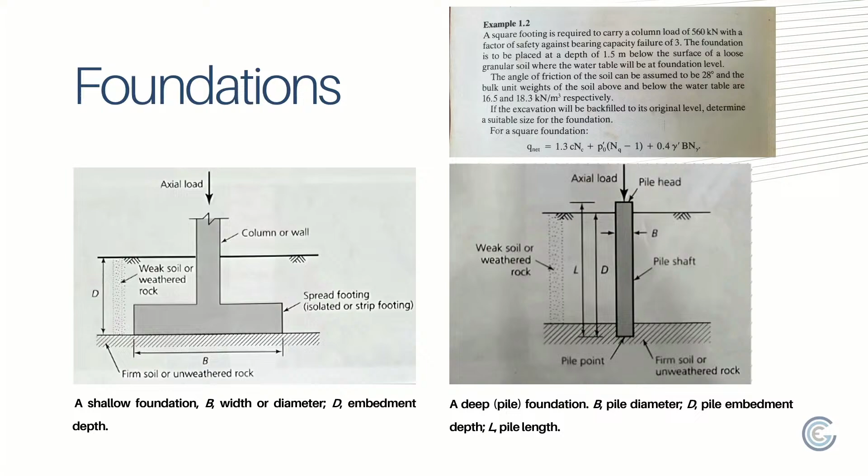So a shallow foundation is where the width B is much greater than or equal to the depth of embedment below the ground surface, right? Whereas the opposite is true for a pile.

So at this point, I want to give you guys a little exam question, but time doesn't allow. But surprisingly, we had to do all these things by hand calculation. I could put that question right now to ChatGPT. I don't want to be a student now. It takes the fun out of it, right? 1 minute, you get an answer, right? But whether it's correct or not, you don't know, right?

So another term that's used a lot in our field now is geotechnical earthquake engineering, critical. And you start to see things about seismic site response analysis, spectrum, site class, what is a site class, soil-structure interaction, liquefaction, big topic, right? And that's a word I do not put in reports very lightly. I'd rather talk about liquefaction potential than liquefaction.

When people read the word liquefaction in a report: oh my God, the whole site is going to liquefy and suck the building under the ground like the giddy house. Far from the truth, right? It's really a statistical analysis that we do to measure risk or the likelihood of a site or parts of a site that may or may not liquefy, right? So it's a risk analysis. So we have to be very careful when you read a report that says the site can liquefy. Sometimes that's not the case, right? And it basically affects the project moving forward.

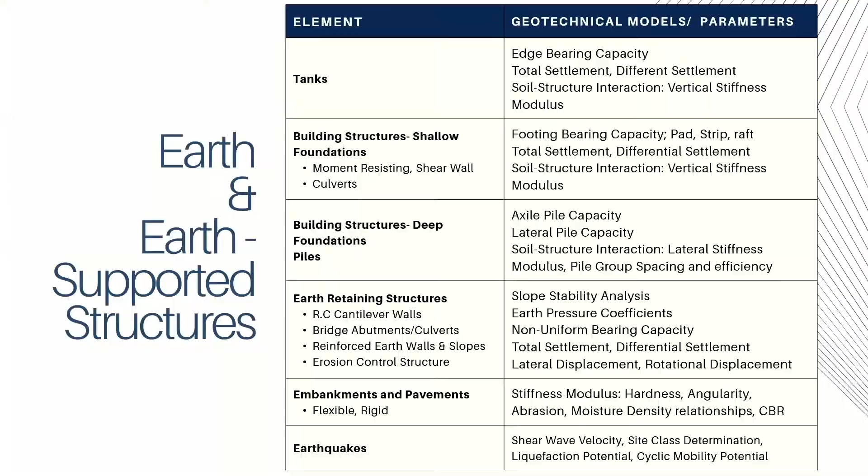And more importantly, we can't have any workers who have any form of drugs in their system. So someone who smokes marijuana can't work for us, right? And we spend a lot of time on training, use of these drilling rigs, because safety and insurance in this sector is critical. You pay a lot of money just to even work on these projects.

And then you can have an idea of what parameters we have to provide in terms of running the analysis for a tank foundation. Allowable bearing capacity, total settlement, differential settlement, subgrade modulus, stiffness. These things might look new to you guys, but we can't get any of these things without a borehole or two, right? And lab testing.

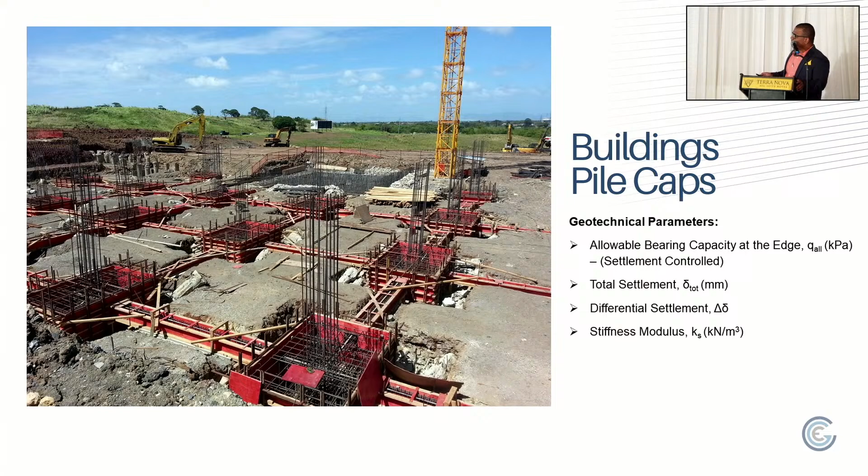Building, pad footings. You guys are accustomed to seeing pad footings. This is the hospital building, done by China Railway. A 5-story hospital designed to a much more scrutinized seismic category than a normal structure. And we have to provide all these things and check settlement over the building footprint. Pile caps, very important. Connected by ground beams. So this is what a pile cap would look like in terms of the construction of it. And then we go to raft foundation.

Can you just look at the ground and tell me what I should do for this new building? Just do 1 borehole. I said, nope, can't do it. 2? Nope. 3? No, sir. 4? All right, we'll work with that. Send a mobilization invoice. There's always a negotiation; clients don't want to do a site investigation. And I'm not willing to take that risk.

Because when you spend millions of dollars investing in a building like this, and you want to spend some change on that risk, I'm willing to walk away from the project. Right? But some clients like to push the limits, right? Because it's always a risk when you know what failures can happen.

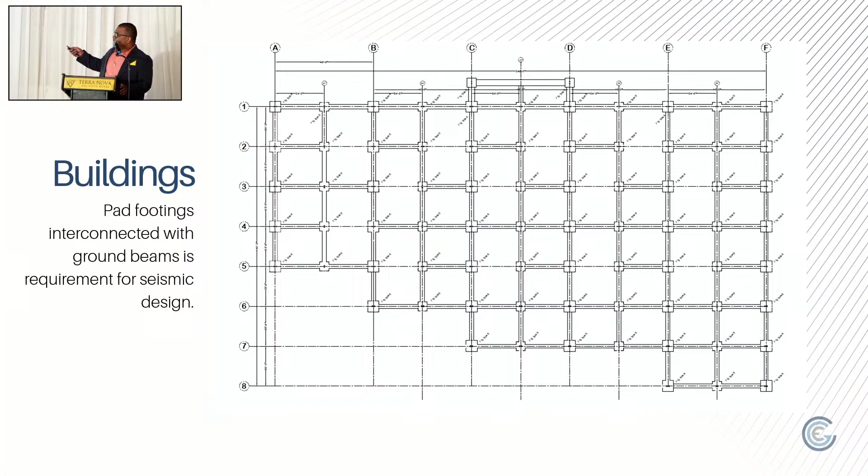So let's take a typical warehouse structure. We could take any line in terms of the distribution of the loads across the building. And we're required now to have these structural ground beams for seismic design. And then we can produce a stress distribution model below the footing so we can see what footings are loaded, where the stresses are, measure deflections, settlement, and all these things, right? These finite element models, you can do a lot of things with them. But like anything else, garbage in, garbage out.

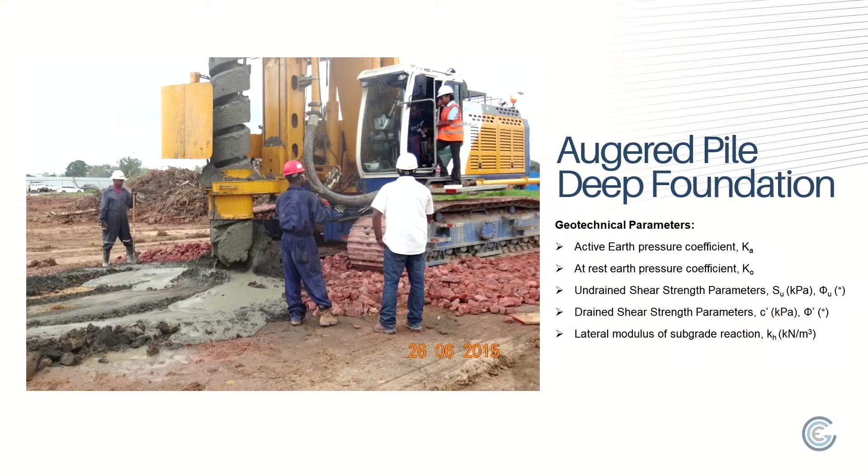So we have a lot of CFA rigs in Trinidad as well for deep foundations, and for lateral models, the modulus of subgrade reaction is a very important item that we need in terms of the analysis, the shear strength, undrained shear strength if it's clays, and how we analyze these types of piles.

3,345 kilonewtons. And the more pile tests you have on site gives you the ability, because you have more reliable data, to actually reduce the factors of safety that we talk about in allowable stress design. So I can now give the clients options in terms of maximizing efficiency by using fewer piles because I have data, right? So all this is tied back into the final design.

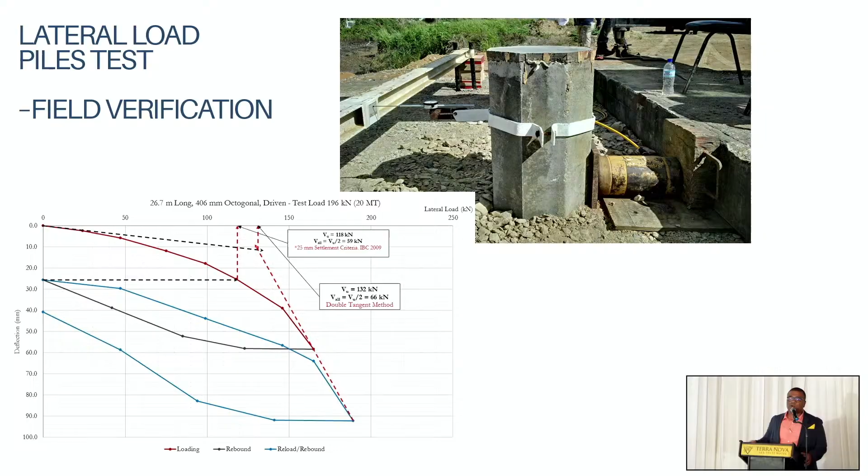I say this to also say that in Trinidad we have about 5 geotechnical companies, all local, no foreigners. And we don't compete. Yes, we might compete on price. But if one geotechnical firm has a problem, well, they always come back to Dr. Gay, right? But we always try to work together. If a piece of equipment breaks down, come by me, no problem. We work out something. Because at the end of the day, the value in this is building the practice. And I value building the practice more than dollars and cents. Right?

So 60% of the failures that we have to deal with every day are retaining walls. I'm going to look at some of them. I'm going to talk about a very important one, which is a bridge failure. So remember the modes of failure for a retaining wall.

I didn't want to bring it up, but COVID did not do justice to some of our engineers, in that we have some graduates who came out with a civil engineering degree and don't know what a retaining wall is. I kid you not. Right? So for our younger engineers, if you want to be good at your craft, you have to put in the work. Ask the questions, do the calculation. Don't ask ChatGPT. Do the hand calculation.

When we investigated it, we realized that the contractor backfilled the retaining wall with clay, highly expansive clay. Half was done in sand, and the other half, at the joint from there down, clays, no drainage. And this was done by the ministry. So I say this to say that your design is just as good as the construction quality, and drainage is key to our retaining wall infrastructure.

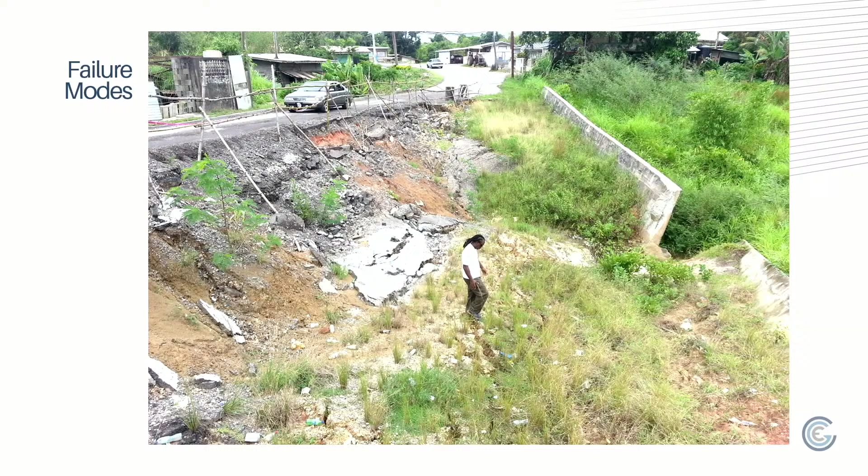These walls cost millions of dollars. And in one pipe leak, that's it. Right? So we have to now come up with a solution. A simple one that we did was that I've designed an over-designed box drain with a metal strap on it, and strapped the pipes to the box drain so that when the pipe leaks, you can fix it, one. And two, if it leaks, it goes in the drain. The water company fought that, and now they're using it all over the place. Right? Common sense, not so? So we have to be careful with the whole infrastructure for these types of retaining walls, reinforced concrete walls.

We have other types of walls, Allan Block retaining walls, and most clients would listen to their contractor over the engineer. You want to build a 30-foot wall with a system that cannot take that type of lateral stress. And these are the outcomes, right? And then we get called. As a matter of fact, this is the second wall he built. Right?

More so in the Caribbean, as our infrastructure ages, scour. Retaining walls along riverbanks, scouring the foundation. Nobody checks, nobody maintains anything, so nobody is checking to see how we're going to treat with these types of failures. And then we have a tendency in the Caribbean to creep to get as much land as we can on the riverbank. And these are sometimes the consequences. That is the man falling down in the river there, and his building collapsed in the back.

I just put in this slide to show you that we do a lot of different types of retaining walls. This one is called a flex MSE wall. No concrete, fully vegetated wall with these bags wrapped in a uniaxial geogrid. And we put plugs in the bags with, I think it's 30% organic with sand. And you put the plugs for the plants you want to grow. And in 2 weeks, that was the outcome. Right?

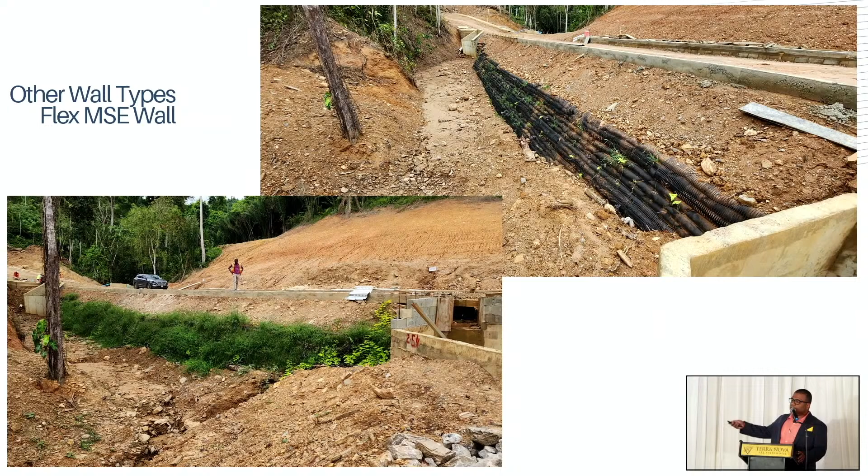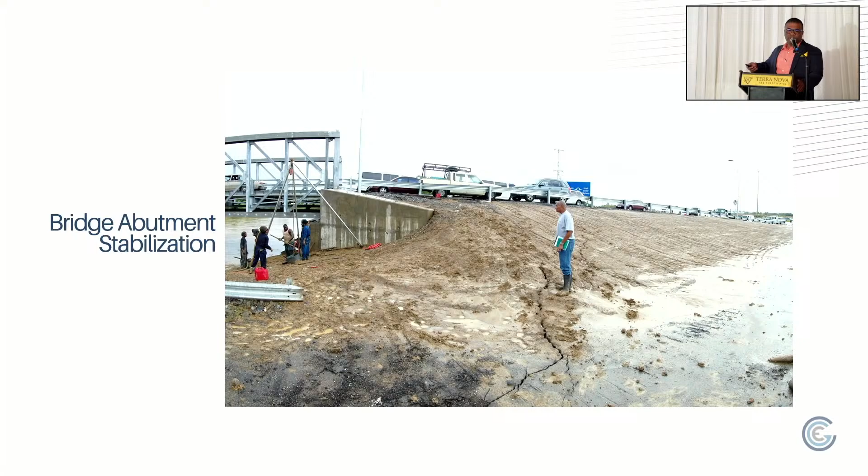As you can see, where this gentleman is standing, you see that crack going right through the embankment. That's us trying to do our investigation to figure out what's happening. The entire abutment was moving. And if you realize something else, what is on the bridge? Live traffic. Right? So, you know, things go politically. Sometimes you have to do what you have to do to get things done.

So the free end of the bridge was moving to the other side, and it ripped the anchor bolts out of the other abutment and punched through the other side of the abutment. That's how high the stresses were. Right? The engineers cut the beams to put a 1-inch thick plate so that the beams would not go any further, and it punched the plates through the abutment again. That's how much movement we're getting.

So we had to come up with a design with CFA piles to anchor the bridge. That main beam here was designed by my classmate, I won't call his whole name, but Danny Chin. In that we had two 500-ton jacks that we jacked each system against each other to get movement. And then we cast the beam to transfer all that load to the piles.

That's the difference when you understand the slope stability analysis of how deep-seated the movement was. And for engineers who design embankments and bridges, just for clarity, when you want to approach an embankment onto a bridge abutment, you have to consider that there are additional stresses on the piles. The embankment produces additional lateral loads on the piles, not just the active that you measure from your Ka, PA equal half Ka H squared, right? Gamma. So you have to consider all of those things.

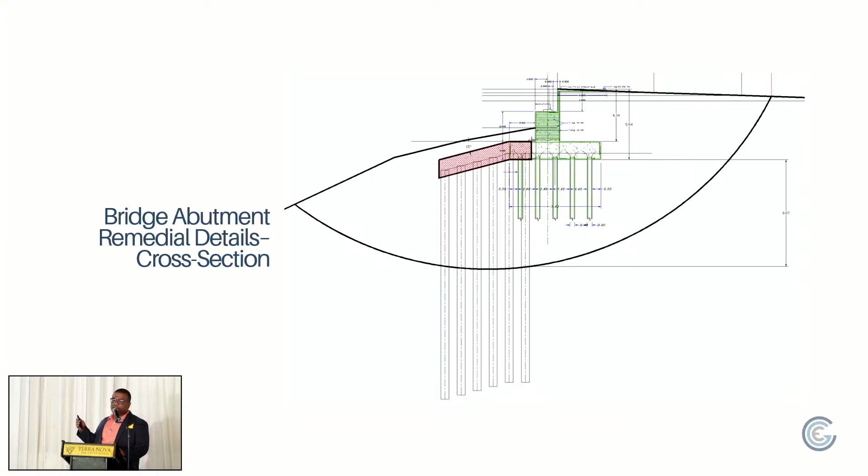You know, Dr. Gay, as brilliant as he is, the shape of the design is for a reason, that the resultant load, right, is at an angle. So he wanted the piles to be designed on a downslope so that if the bridge tries to move, it pushes the piles in the ground and increases the actual capacity. That's the solution implemented. That's the guys taking out the jacks.

So, in line with our sustainability plans, we try to do a lot of projects where we reduce the amount of trucks and concrete and emissions coming to site. And that's what Tensar allows us to do. And more of our clients are asking for more sustainable designs. We have reinforced earth slopes with these coconut fibers where you can put topsoil, put the coconut fiber and stabilize the slope. And then you could spray it and vegetation grows for erosion control.

We have cut slopes. We have to understand, when we cut a slope, for it to remain stable, how we do it, is it going to be stable? Have you considered what we call pore pressure changes in the slope when you have rapid drawdown? In other words, when the reservoir goes down, when it's refilled, how does the pore pressure regime inside the cut change, and how do you model it for long-term stability?

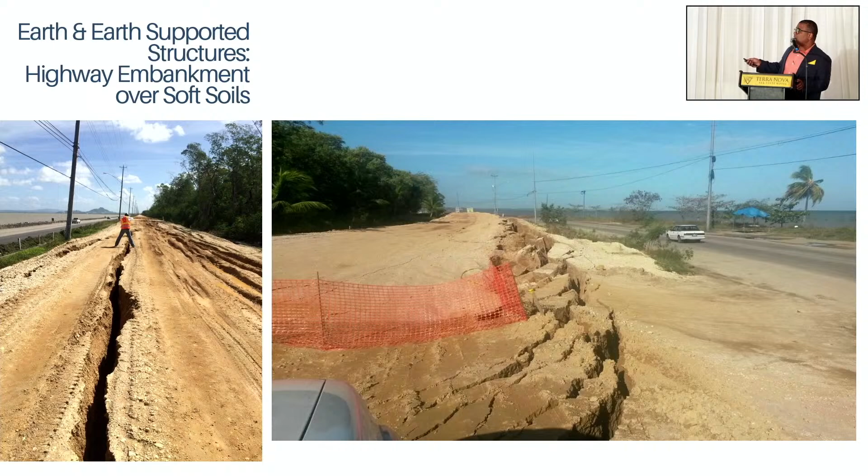Pavements. We do a lot of pavement investigation and redesign. And as you can see, rutting is a big thing. You have to understand the stresses below into the subgrade and sometimes what material is used in the design. In this particular case, as the government expanded the highway, sometimes they just widen a shoulder. Sometimes the shoulder is not designed to carry.

Remember, as you move the traffic to the left, the heavier vehicles move as well. So if the trucks coming from the quarries are coming in now to drive on the old shoulder that is just expanded or widened, sometimes it doesn't carry the load, right? So you have to investigate the pavement to understand what you want it to do and how long you want it to remain.

So site investigation is critical to preventing all that we just saw a while ago, right? And it's important that we get the information so that we can actually do it. One of the major complaints that I hear every time I come to Jamaica: man, them take too long, brother. 1 year, 6 months. Those things are unacceptable in this time and day.

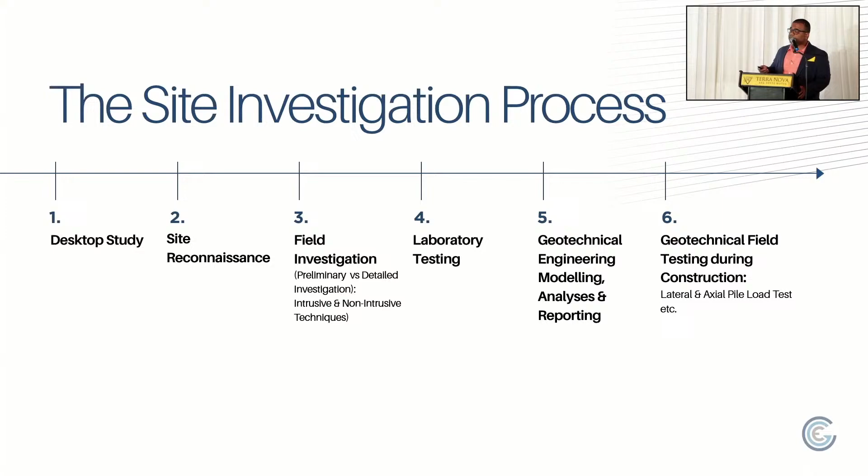This document I'm going to share is from the oil and gas sector, and it outlines the entire specifications for site investigation, right? All the ASTM standards, so that you guys could understand what is required from the geotechnical consultant. 5 minutes, right? For this document also, they have a checklist. It goes through every single geotechnical response that you want, and you can just tick off the things in Adobe and send it to the consultant, exactly what you want to be outlined in the report. It covers every aspect of the geotechnical practice.

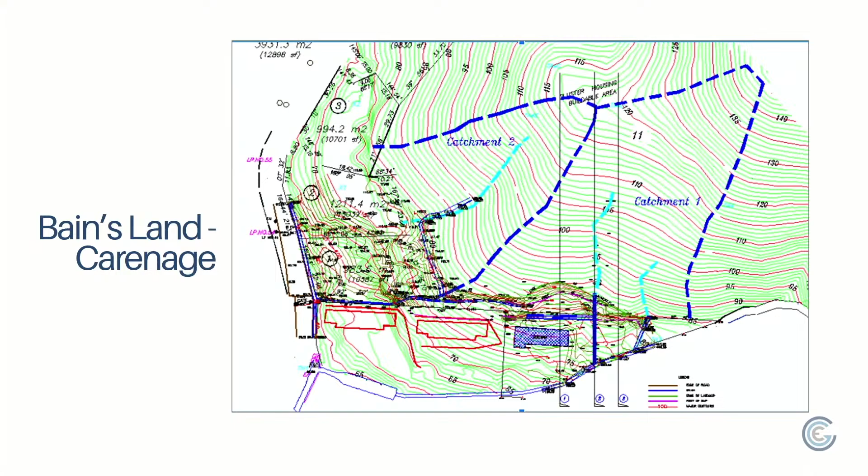For this study, we need the maps because we look at things in terms of scale, right? For a house, we wanted the 2 boreholes. But sometimes we send the surveyor out and the man only surveys within the boundary. But look next door. We have things outside the cadastral boundary that are going to affect the project. So sometimes you have to look outside the site to ensure that you cover everything. For this particular project, the client surveyed just beyond its boundary. That's the extent of the site, the mountain behind the property, so the catchment and the size of the catchment. That water course came down.

He wanted to build a townhouse, and he cut the slope. During construction, luckily on a day when nobody was there, the mountain came down and took half of the building and crushed it. It would have killed everybody inside there. So this is to show you why the maps are important, why we need to study things outside the site boundary, because they can impact your site.

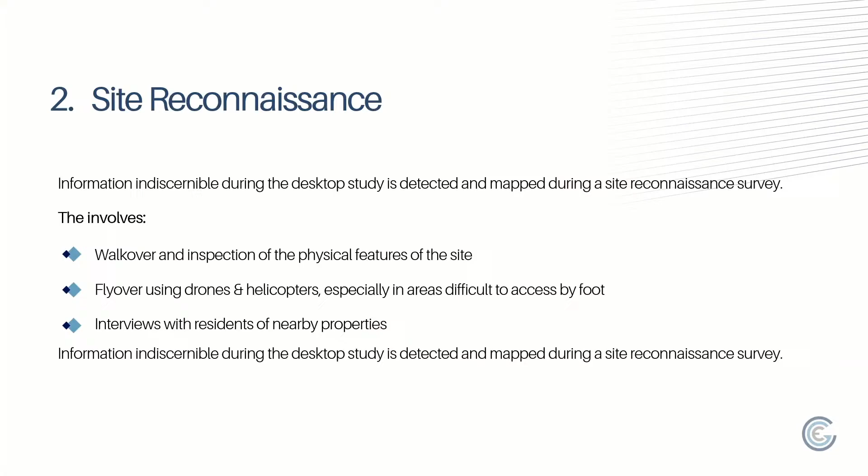Site reconnaissance. I'm going to stop after this because there's so much more I can say. I'll show you this last example. For the students over there, engineers need to go on site. You can't sit down in office all the time and run computer. I cannot design anything I don't see. So you need to relate the two by going on site, going in the bush, put on the coveralls, and observe the site, right? And by talking to people, it gives a good indication of what you can do.

On this particular site, we went using the maps and looked at what took place. It was a quarry there years ago. When I went on the site, I saw some guys. There are some squatting communities around the site. I said, yo, dada, what go on here? How come nobody squat inside this stuff? Man said, boy, daddy, bossy, every time rainfall it moving. Not one borehole had to be done for you to get information. Obviously, you'll have to verify it.

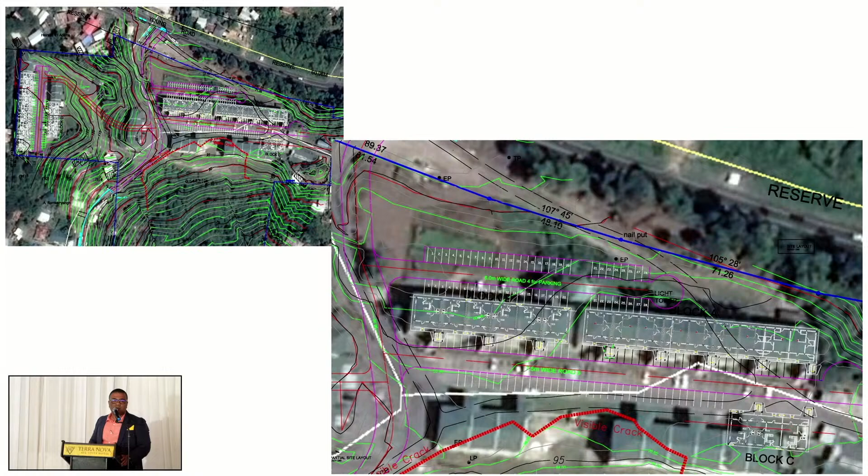52 million, 1 billion in Jamaican dollars today. Failure. Right? So going on the site, understanding the requirements, the history of the site, but it's a brownfield site, a site that was developed before, right? They tried all kind of things to save this, they had to demolish them. Right? And there's about 200,000 people on a waiting list for housing.

So the lessons learned that I just explained, right? That the desk study and the site reconnaissance should be used to plan field investigation from the boreholes, going on site, seeing what you have to do, cut access if you need to see all aspects of the site. These things I could share with you in terms of planning a site investigation. For a tank, you definitely want the one in the center, one at the edge, for differential settlement. For a building, there are many guidelines of how we can do.

Simple things like a test pit. And you need a staff properly so you can see the pictures properly, right? How things transform and change. You can use an excavator just to document what you see. Standard penetration test, which is really what we do. This is one of our latest rigs that we have. We have just upgraded it to do also CPT, right?

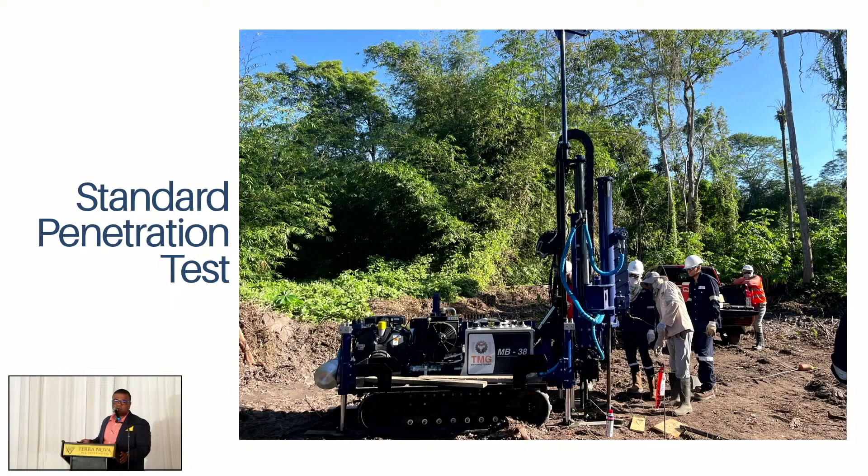And Herbert would understand this, but you can't be a grub and use this rig. You need at least 3 brain cells, right? Guys have to be trained. Okay, you can lose a hand, lose a finger if you don't know what you're doing, right? So our technicians are actually guys who use this type of rig, right? I'm gonna skip that. That job we did in St. Lucia.

The CPT now is what we need for soft alluvial soils because everything is computerized and it's giving you data real time. You can stop the cone. If it's a piezocone, you could actually measure pore pressures in the ground instantly. You could do a consolidation test in the ground. The only thing is that these things are not cheap. The probe alone probably costs about 8,000 US, right? But it's needed to give you the information in a faster time frame and also needed for liquefaction development.

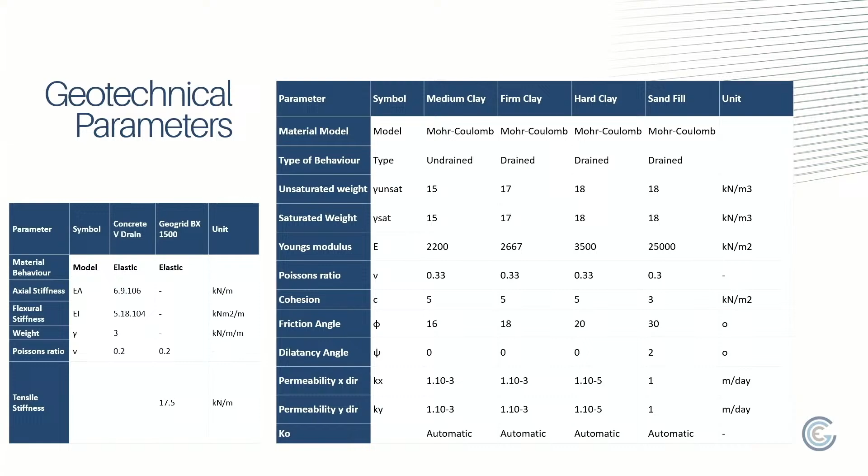So we do all these lab testing just to get the geotechnical parameters. These parameters are plugged into models like these where we can actually model an embankment, the slope stability, the full gamut of the design and actually model it according to the construction output, right? For most of our sites, I'm going to do my own graph, probably present at the JIE one day, in that the monies that clients have lost in terms of the cost comparison for a site investigation is chump change, right?

Here's one site, the client said he only wanted 2 boreholes. We did 2. This one was completely different from the next. One was soft, one was hard. Which one do you use? The soft? Well, he implemented one pile. He got 60 tons on gravel at 3 meters. The next pile disappeared in the ground. He spent 1.8 million TT dollars. That's over 30 million Jamaican dollars, when he could have spent less than a million Jamaican to save the problem. And I could go on and on.

In that somehow we have to educate the clients to understand why the investigation is critical. Everything starts from the ground. And we need that parameter thing. So it's not something that can be rushed. So my advice to the fraternity is that we're going to take our time to build capacity. We have the talent in Jamaica, right? We have the regional presence that we can cross collaborate, right? And we can build the capacity.

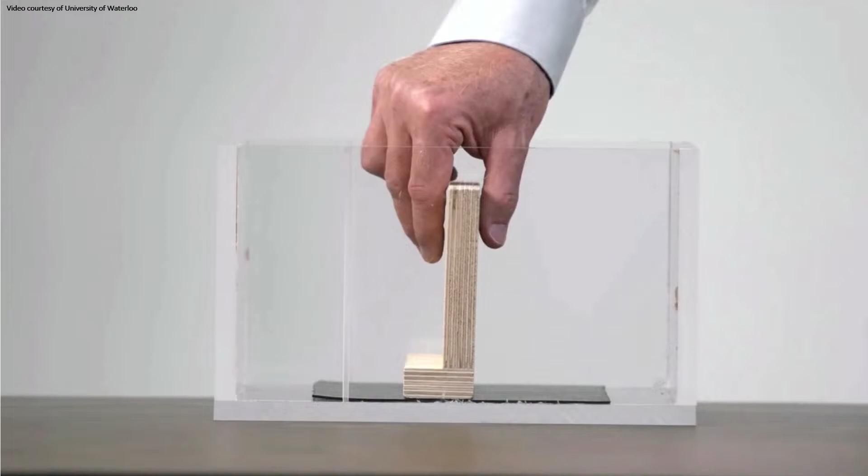All right. So now we're going to take the same structure and we're going to switch that. We're going to put the same marbles. And now we can get a little higher. We can get up to 11 centimeters. It's the same structure, the same marbles. We use them to our advantage. Okay? So we use the soil as help to make our structure stable.

So it's very, very important that my friend Charles understands that soil, because that information is what's going to give you and me the parameters in order to extract as much performance from that soil that you already have at the job site and you already have to spend the money on. Okay? So now let's try to do something with that soil and that information.

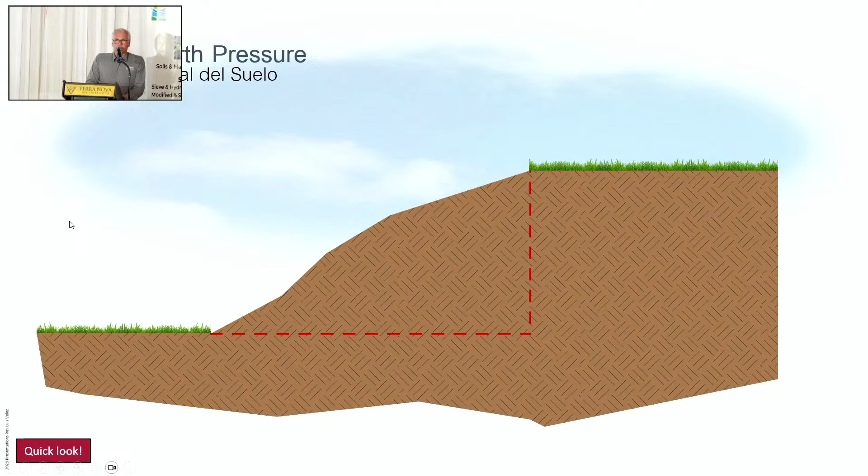I'm gonna use one of my colleagues here, Angel Conde, my boss, and we're gonna use him as my model for this demonstration. So I'm gonna ask him to miraculously make a cut and hold that backfill instantaneously. Okay, so there will be no deformation. That is called at rest. So there's no deformation on the soil, and he's doing all the force to hold that in place.

My boss hasn't been in the gym lately, so he gets a little tired and he allows a little bit of deformation. Now my soil condition is in the active state. And if you can see, he's not holding the whole soil. He's only holding a wedge, a part of it. And that's how we geotechnical engineers lie to the soil and make it work for us.

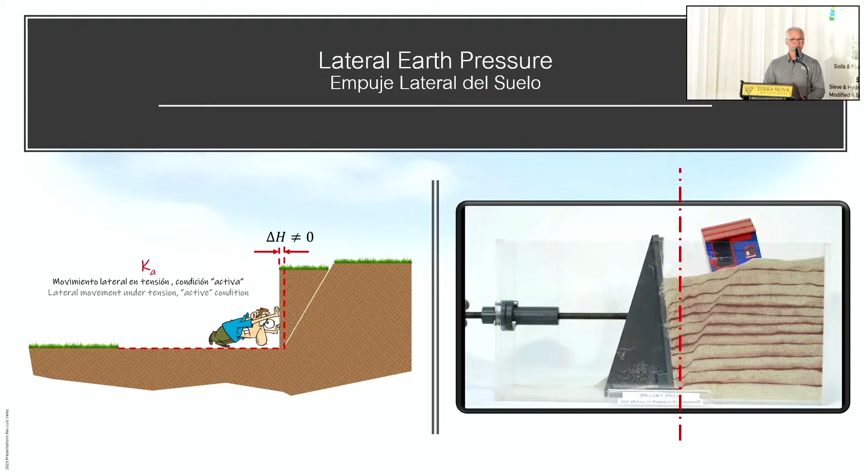You can see in this demonstration that the retaining wall that I'm moving forward basically creates a wedge in the sand. Also, depending on what type of soil I have behind, I have to put more force or less force. If I'm working with gravels and sand, easy. If I'm working with clays and silt, more challenging.

All right, so now I don't need my boss anymore, so let's get out of here. All right,

perfect. So we know that we need a structure over there. What kind of structure? We haven't decided that yet, okay? So if we understand the soil, and if we understand how much force that soil will apply to our structure, now we can make a choice of what type of structure to use. Let's say we can use a cast-in-place concrete wall. We can use a gabion wall too. It's a gravity wall also. Or if you want me to pay all the bills, you can use one of mine.

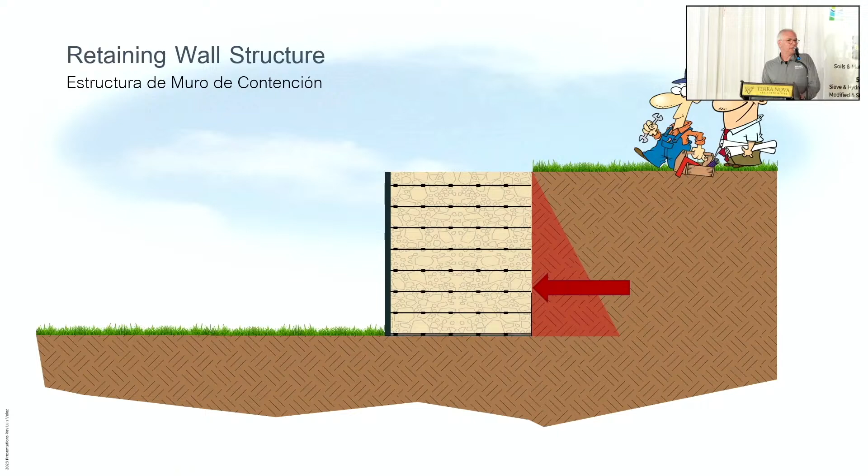All right. At the end of the day, both structures, the concrete wall and the MSE wall, are very, very similar. I'm sure that you guys in your preparation did some kind of calculations to design a concrete wall. It's not much different than an MSE wall.

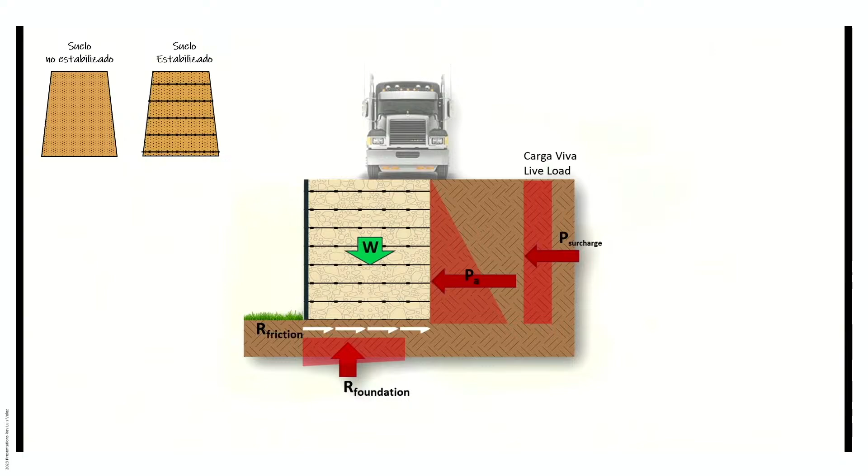All right, so for this type of structure, we have to check it as any gravity wall. We have to check the sliding. We have to check the overturning, bearing capacity, and all that stuff. All right. But at the end of the day, the structure is just as simple as a reinforced mass with a retained soil and a foundation soil to support it.

The facing can be whatever. Charles showed you guys different retaining walls and slopes with different facings, so we can accommodate whatever facing is needed. Sometimes, depending on the facing, we're gonna need a leveling pad just to make sure that the first row of panels or blocks is level. Geogrid, that's what's gonna confine the soil and create the mass.

If you see there, if I add 300 more layers of geogrid there, it's not going to change the behavior of the block. So when you hear somebody say, hey, if I use this type of geogrid, the length of the geogrid can be shorter, that's not true. At the end of the day, the soil weighs whatever it weighs, and the mass is whatever

its width is. Okay? Very important, like any retaining wall, it's very important to include your drainage system. If not, you're going to pay the price. Just spending pennies on the drainage system will save you thousands or millions of dollars, or your reputation. Right?

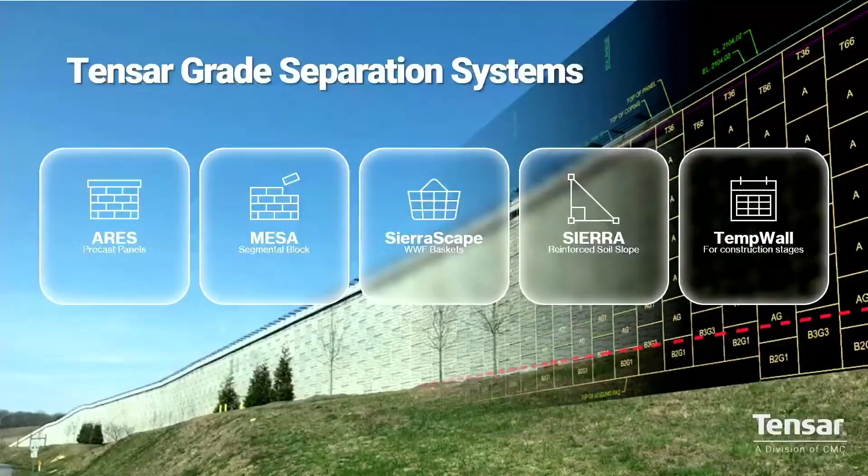So now that we understand what a gravity wall can do, we can make a choice of what type of retaining wall to use. And we have many options that we can work with. One of them, let me move. There you go. One of them would be precast panels. You can see it could be as beautiful or as plain as it could be. Very easy system. It has a mechanical connection behind the panel. It's very easy to install. It should take only 30 seconds per connection, no more than that.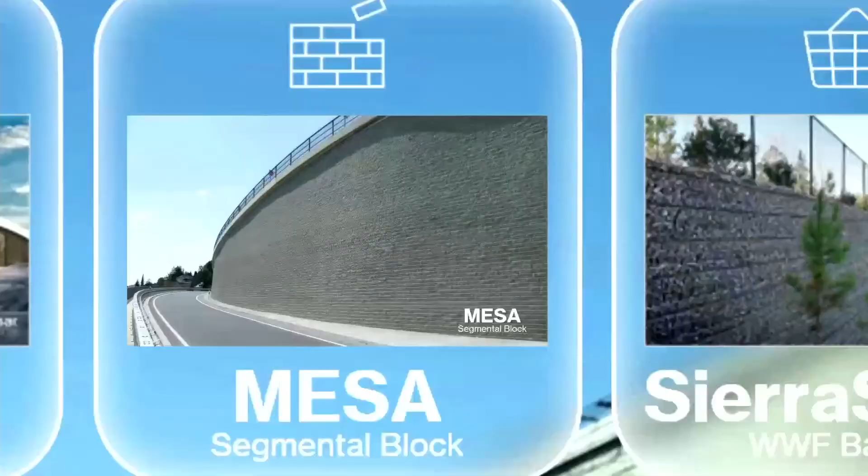Another type of block for MSE walls would be what we call Mesa. I'm sorry, I'm trying to get my cursor here. There you go. That one would be segmental blocks. Again, mechanical connection. What is mechanical connection? Very important here in Jamaica because you have a very seismically active zone. And that mechanical connection between the facing and the reinforced mass is very important. So again, you can reach whatever height you want, if we're doing the design correctly. So we can have a landscaping wall or a wall like 60 meters high.

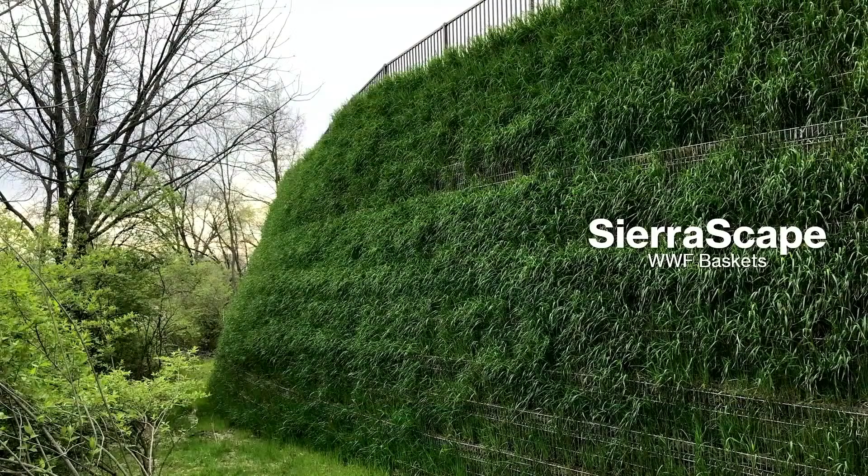Next, I have something that is called SierraScape. It's a wire basket, mechanically connected also. And you can build the retaining walls at whatever size you want with the facing or the aesthetic that you may find interesting too. You can vegetate those too, if that's your choice. Sierra is our slope system, and it can have a vegetated face or rock face. You can have a wire basket at the face or just plain.

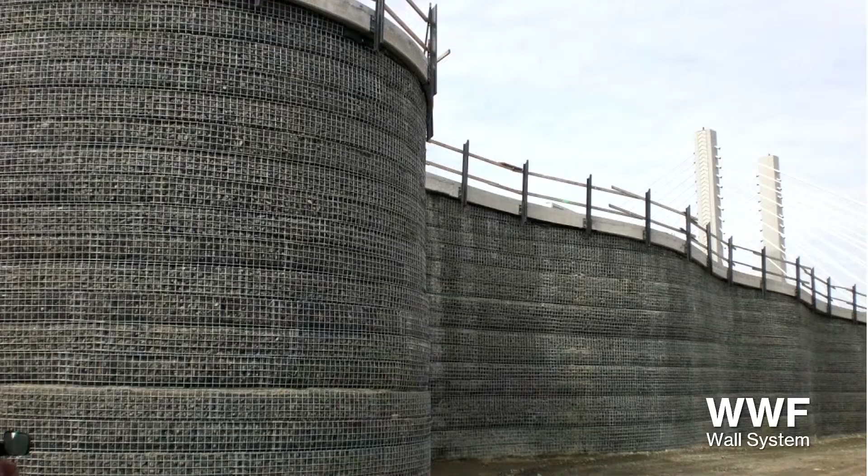All right. So with all those systems, sorry, with all these systems, we can now incorporate that in your project. Let's say that you have a concrete wall with a slope on top. Well, we can switch that to an MSE wall with a slope on top. A slope on top of any wall is a tricky part. It's not as simple a design as it's supposed to be. So we can have a reinforced slope on top and reduce the height of the wall, or we can switch, and this is a more stable condition for the calculations.

Or you can go for what my kids think should be the right solution for every project, which is a vegetated facing. Depending on the type of facing, the cost associated with them will be different too. If we go with vegetated faces, it will be less expensive. If we go with panels, it will be a little pricey, right? Let me pass all of this.

Okay, so in order to design this, you first need to have the geotech information. You need to fully understand the technology and the concept behind the design. So that's where Charles and I will be here. I'm more than happy to come back to Jamaica and explain to you guys step by step how to do the design. That will be a very good excuse for me to run away from the cold weather in Atlanta. So please, the cold weather is the best time for me to come.

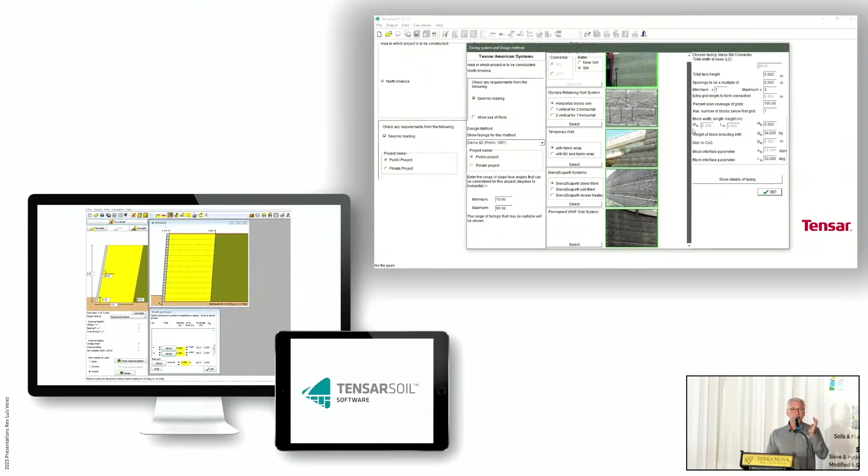So this is our software. It's called TensarSoil. I will tell you guys at the end of the presentation how to get a copy of it. But you can see here it is very simple, easy to use. I could select just what type of project I want to design and select the facing that I want. That's what I'm doing here. Once I select the facing, I could select what design methodology I want to use. It's very important to understand the pros and cons of each one of them.

I could apply my loading conditions or my seismic ground acceleration, change the wall height, the soil types, everything in just one single software. And I could design and analyze any project on it. Okay.

Okie dokie. So now that we have an understanding of the retaining walls, let's look at slopes. Okay, a slope is another type of structure. It's a gravity structure, but we analyze it in a different way. When you try to apply the retaining wall calculation to a slope, or where the facing is too flat, they don't work quite right. Okay, so the calculation doesn't work out quite right.

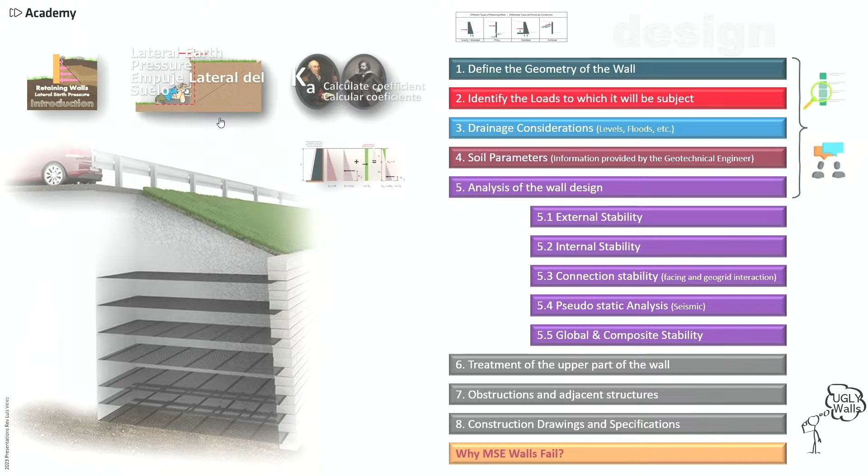So for that, on the slope we use limit equilibrium design, which basically makes sure that the acting forces and the resisting forces are in check. Just to give you an idea, a very flat slope with a well compacted material will be pretty much stable by itself. But sometimes when we try to push the limit, then we need extra help.

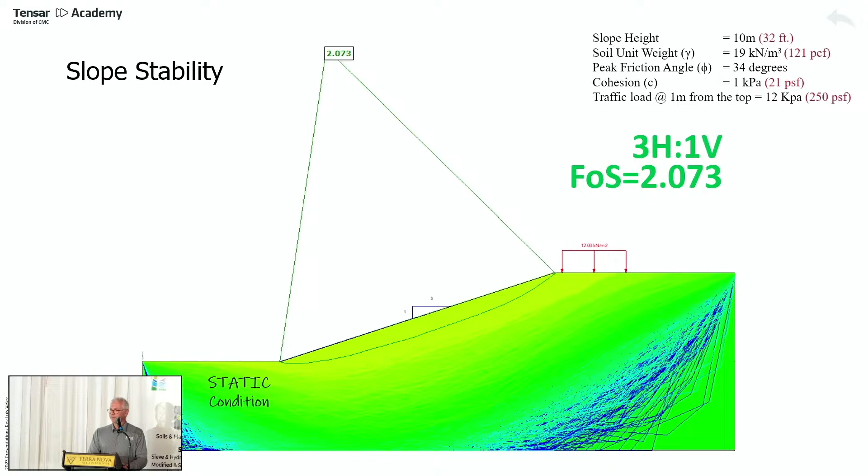Depending on the structure or the use of the slope, it could be okay, or we need to do something else. Let's say if this is a road, it probably will be fine. If we have a building on top, a hospital or something like that, no, we need to increase that factor of safety to at least 1.5.

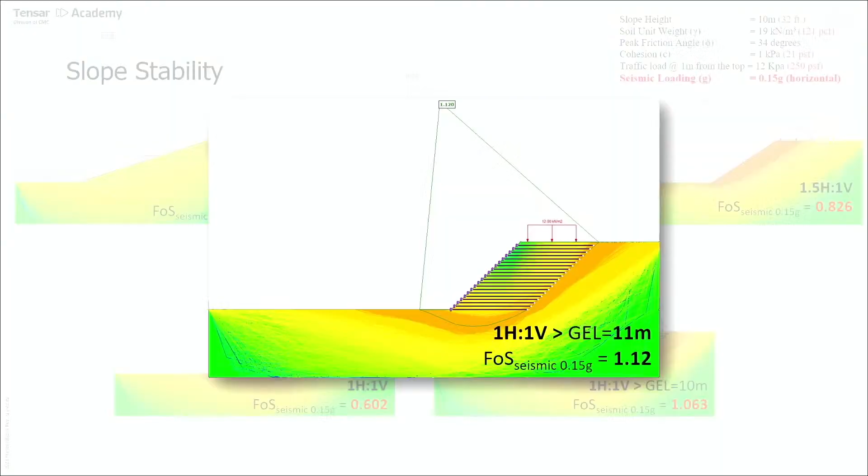So, oops. So you can see here the factor of safety of all of them. And when I reinforce, when I apply seismic conditions, the factor of safety, even of the one that is reinforced, doesn't meet the requirements. So for that reason, I had to increase the length of the geogrid in order to achieve the factor of safety.

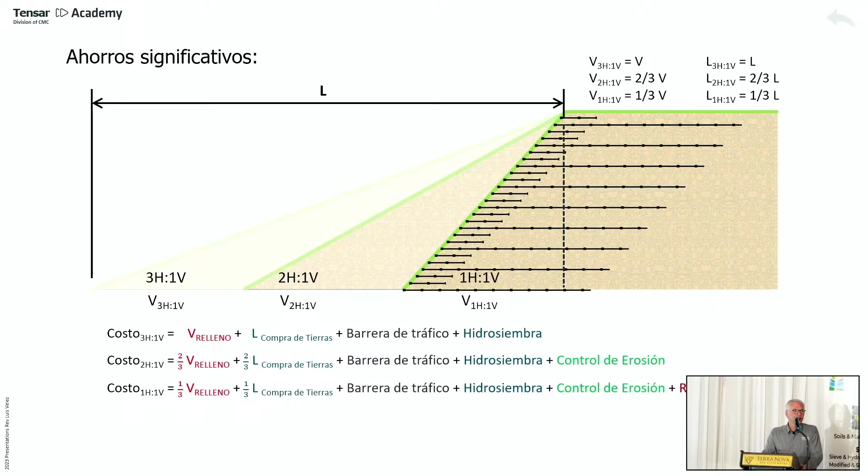When you're doing your analysis cost-wise, you have to look at everything in that analysis. Basically, if you have a 3-to-1 slope or 2-to-1, you have to take into consideration how much land you have, the savings on the right of way, the cost of the geogrid. All that will be part of your cost analysis, just to make sure that you select the right solution.

Again, depending on the system, that will determine the cost for your project. You can reduce the right of way. You can increase the flat area on top of your project. You can eliminate a retaining wall, or maybe use it for a slope repair.

All right. So Charles showed us very nice pictures and projects with problems. But let's take a look at this in more detail. We have our soil. That's what composes our slope. And we put a house, the beautiful house that we want, where everybody spent a lot of money on the architect, structural engineer, and everybody else to design that house, but nobody spent money on the geotech report.

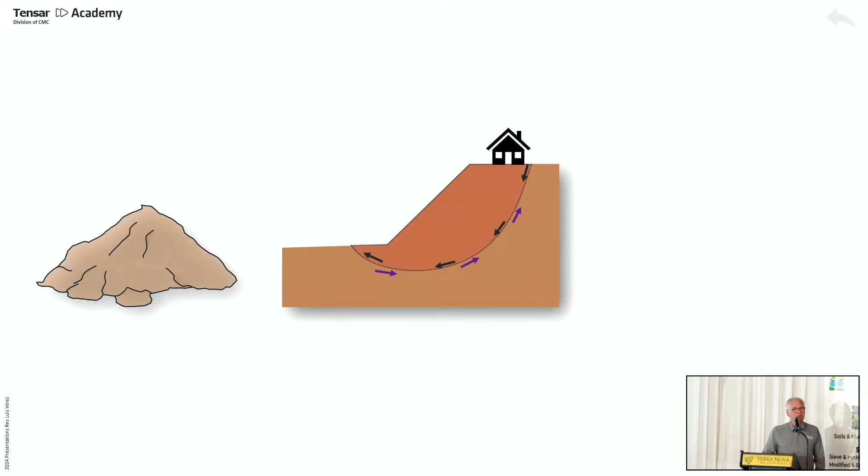So now we have the house with a beautiful view on the top of the mountain, but the soil doesn't like that loading. So a portion of the soil is trying to hold the whole thing together, but the other portion of the soil is trying to move in the opposite direction.

So what is happening if I'm looking in detail here, and this is one of the tests that Charles is going to do, is basically he's going to take that soil and he's going to try to make it shear so he can understand how much force he can extract from that soil. So I push it from one side, holding from the other side, and now I understand how that soil will behave in a failure. If I look at that in detail, every grain that is in the soil will try to help you until the level of the load is too much.

So this is what's going to happen to the soil. I apply the loading, and they're going to try to move, right? So that's how Charles would tell me, Luis, this soil has a friction angle of whatever, and has a cohesion of whatever. Those are the parameters so we can design the slope. All right. And he's going to perform maybe a direct shear test or triaxial test, depending on the type of soil and the conditions that we look in.

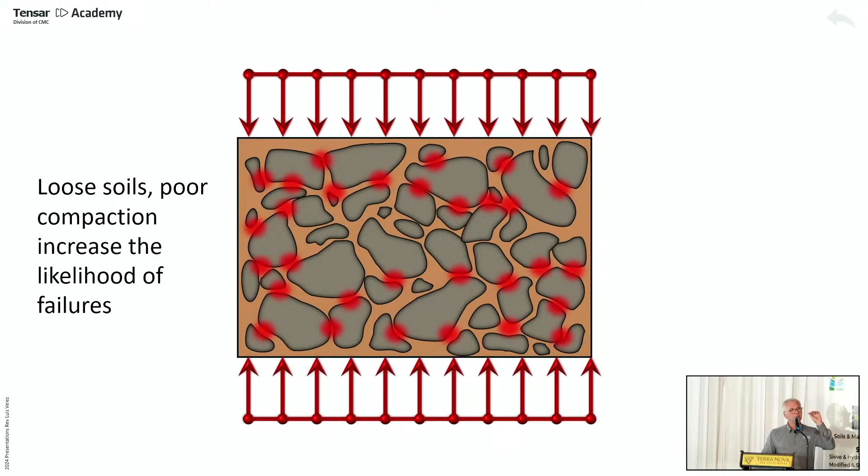All right. So we know that if we have a loose soil, you can see that every aggregate has a very tiny connection with the next aggregate. That means that's how the force would be passing from one grain of soil to the next one, to the next one, right? So a very important thing to understand here is that if we have that material not well compacted, then it will have a lot of deformation and it will be easy to find a failure plane.

If we add water to that, rain, and I checked, it rains here a lot too, then now I have some kind of lubrication between the soils, plus the water would try to push the grains apart. That's the pore pressure. That's something that Charles will measure in his testing also. He mentioned a few failure cases where the pore pressure was the main reason of the failure. That's what is happening when you're looking in very, very detail. Okay?

All right. So one of the solutions would be to compact that, to have a better compaction. How can you achieve a better compaction without testing in the field, just by feeling? That's another thing. So during the construction, we need to make sure that we do quality assurance to make sure that we achieve what we're trying to design. So if we have a better compaction, you can see that now I have a lot of particles in contact with each other. It is the same soil, but now it behaves differently.

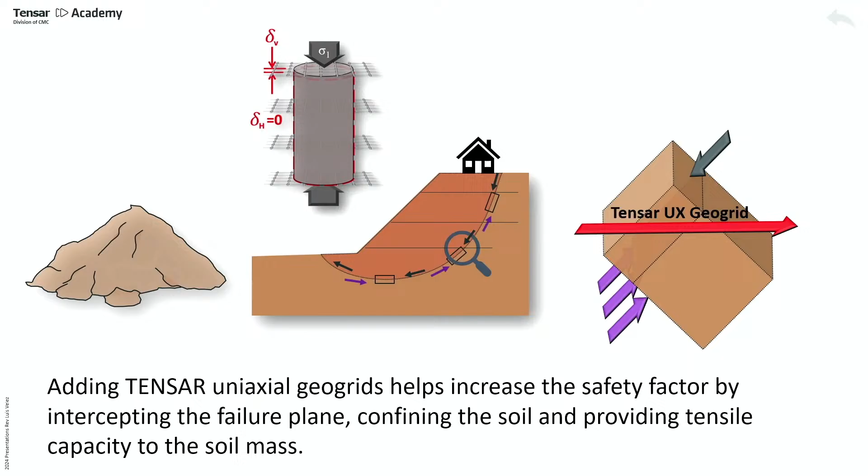So when the soil is not enough, then we add an extra force on that, like a geogrid, like the one that I mentioned to you, to compensate for that force that we need. Okay, it's more complex than that, but I want to keep it that simple for now. Depending on the failure, we have to look at what the solutions will be also. Typically the types of failure that I have researched here in Jamaica have been these two types, translational and rotational, and those are very highly influenced by water levels.

So very important. There are always signs on the project; just by going there, you can start to explore if there was a problem with the stability on your project. Okay, so if you see trees that are not lined up, fences that are not perfectly plumb, those are signs the soil, the project, gives you to tell you, hey, look at this in detail. You don't want to be on the news. All right.

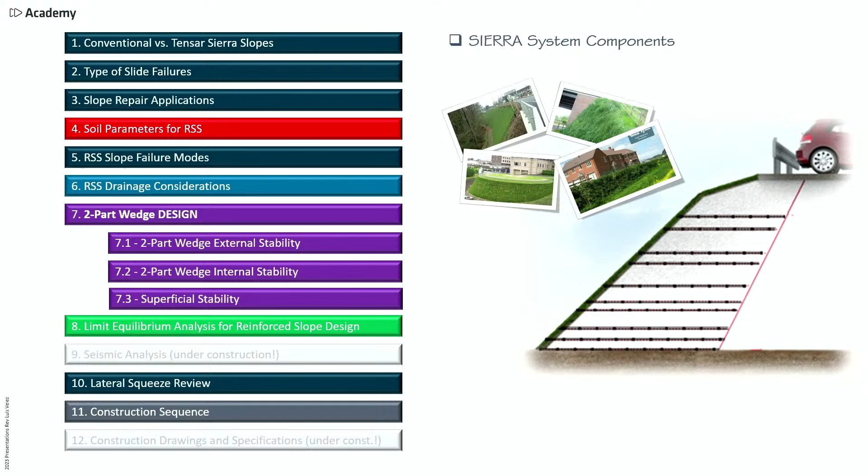All right. So with that, I basically covered retaining walls and slopes. Very important. I feel so odd here. I like to move. Okay, so very important.

Geotech report, very important. That's what's going to give me the soil parameters so we can design the structure. If you don't have the geotech report and you design a retaining wall with just a standard copy-paste detail, it's not that you're lucky, it's that you are pushing your luck, and it's not if it's going to happen. Something bad is going to happen to you. It's just a matter of time.

So if you want to push the limit and get it done, you know that you're going to pay with money or your reputation, right? Most of us, including me, don't have that much money, but our reputation and our career is the only thing that puts food on the table. So it's not a spend. It is just well-invested money so you can sleep like a baby every night. Okay?

Let's change the topic now. So we're going to pass from retaining walls and slopes, which is awesome, beautiful, and the best part of my job, to foundations. And doing my research for this event, I didn't know how much trouble you guys have here. Okay. So let's start with liquefaction.

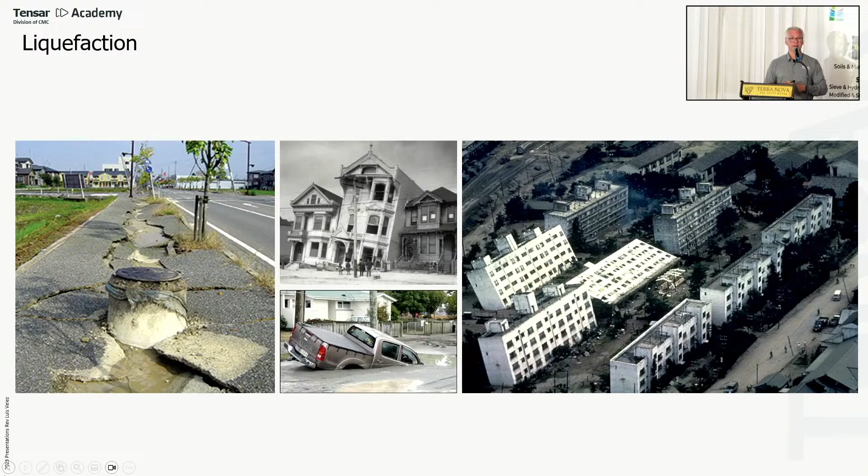So as I said, liquefaction is not new. It has always happened since the Earth was created. We have only paid attention to it in the last 55 years. And we all have seen these pictures around the world of the liquefaction effect and that kind of thing. Those are textbook pictures, all right? As recently as 2024, this happened just before I was doing a presentation in another country. But look at this picture here.

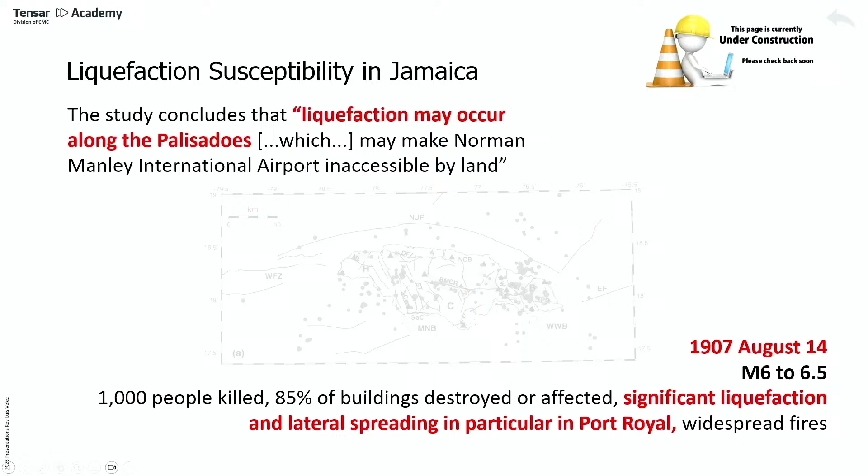So now I need a little bit of your imagination with me here. We're going to apply a shear force, and that shear force could be an earthquake, could be, let's say, a manufacturing plant with a shaker, or a mine with a shaker. It could be something that causes some vibration in your soil. So when that happens, now I need to do like the Matrix and stop time. So there are two options here.

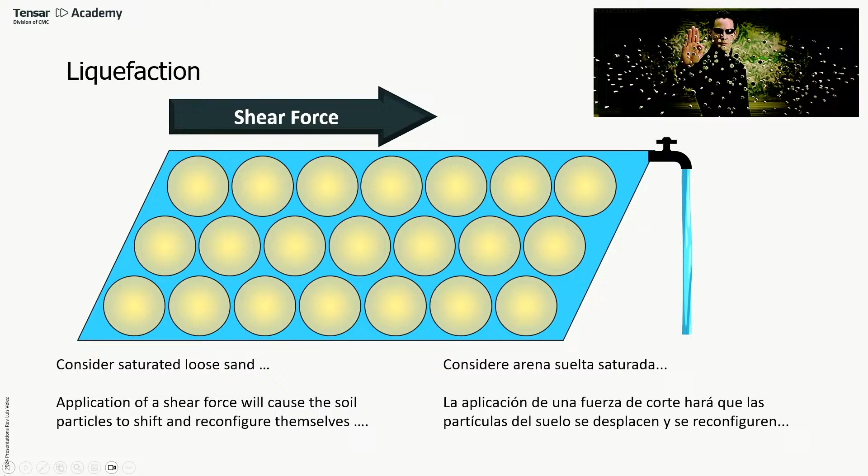The first option is that you can see that now the particles don't touch each other, but if we allow the soil to drain very quickly, and it has to be very quickly, keep in mind these are events that happen in 30 seconds, 15 seconds, something like that. If I allow the soil to drain, this is what's going to happen. The soil will settle, and depending on how deep that happens, your structure on the top will suffer or not.

Okay. Now I need to go back in time, like Back to the Future. We're gonna go back, and we're gonna do the same stuff to the soil, but we're gonna stop the drain. I'm not gonna let the soil drain. And look, you can see that the particles don't have a place to go. The pore pressure will increase substantially. Now the soil will behave like a liquid, and that's liquefaction.

Okay. When that happens, you will see sand explode through the side of the upper portion of your site. You will see settlements, differential settlements, and you will see this effect that is called rattling on your foundations. Okay. All right. So the current practice has been very simple around the world. They know that if I remove a little bit and I replace that with a well compacted material, everything's good. Well, that is good enough.

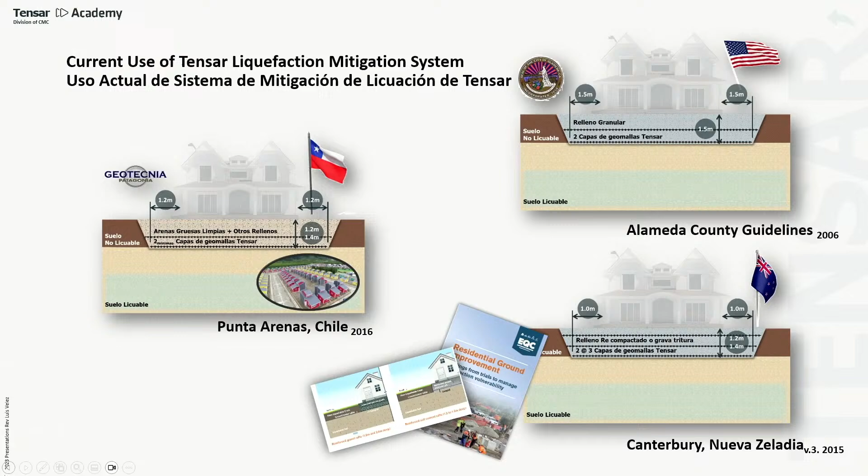But when the client asks you, okay, so how much deformation am I gonna have eventually? I don't know. How much force or factor of safety does my structure have against this event? I don't know. I know that this just works. That used to be the current practice. All right. So basically we know that it works. We just cross our fingers and hope for the best. And there are hundreds and hundreds of projects around the world built that way.

All right. So let's talk a little bit about the crust on top of the liquefiable soil. Okay, so first you need to understand that when Charles said to you that there will be a change in volume of the soil of 3, 2, or 5%, it doesn't matter if you have a building on top or not. We are not there yet. We don't know.

So all this calculation is what is called a free field method. That is, if we have that change in volume in the soil, the deformation on the top could be on the order of 2 or 3, 5, 6%, whatever, but we cannot take into consideration the structure. That's how it used to be. And we have been dealing with this for 55 years. But then came Ishihara, this guy, in 1985, and he took a trip and he plotted this.

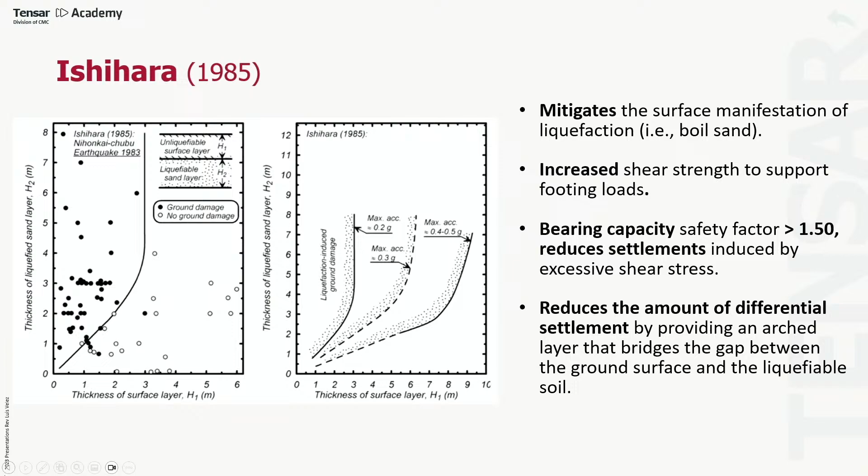He also noticed that on every project he looked at where the liquefaction effect didn't happen, the factor of safety for the bearing capacity post liquefaction was 1.5. He saw that the settlements were less and that the structure performed. So that was good enough. Then Bray and Macedo came in 2017. It just happened. The paper is Bray and Macedo.

There's a lady, Graciela, a PhD student from the University of Colorado. She was a big influence on this paper, but for some reason they didn't include her. That lady was basically who did all the parametric study. So what they did, they took every earthquake from Ishihara plus every earthquake that had happened with liquefaction, and they plotted that in a graph that gives you the factor of safety of bearing capacity after liquefaction and the settlement reported on those structures.

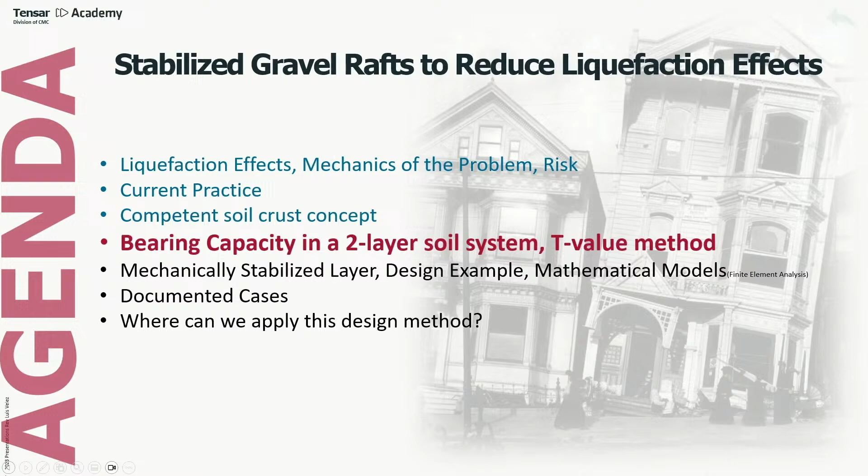And this is the graph. That is perfect for us as engineers. So we know that if we design for a factor of safety of 1.5 or more, or 2 or 3, the settlement that our structure will suffer can be determined. Okay? So now we just need to do the calculation of a 2-layer soil system to determine the bearing capacity. You can see here, I just need to make sure that I have 1.5 or higher factor of safety. I just need to determine the thickness of that gravel raft.

For that, Dr. Andrew Lees developed this method called the t-value, and it's basically a calculation to determine the bearing capacity of a 2-layer soil. It sounds simple, but if you go back to your school book, you will see that every example is with just one soil, and when you have two, you are forced to use Meyerhof and Hanna, which basically has some very strict conditions, that the angle of dissipation is X or whatever, and it doesn't reflect reality well. Okay, you can put applied load, and for that he went to this paper.

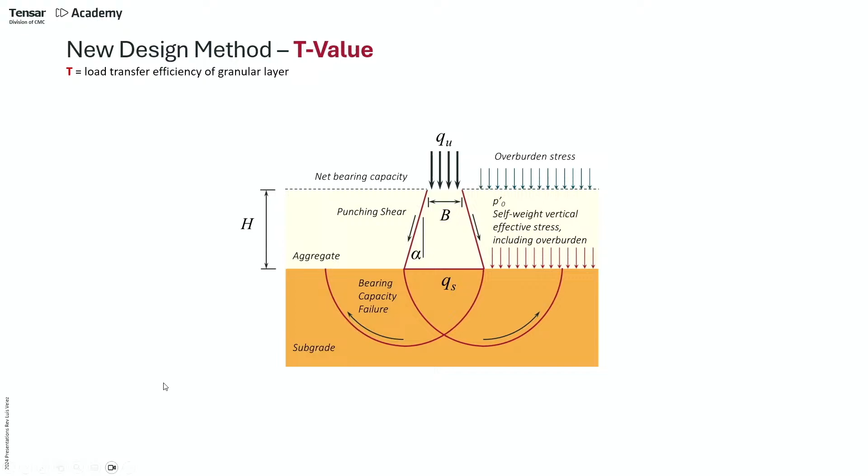Okay, so with that paper, basically what he did, he took all the testing and he plotted it on this graph: the relationship between H and B of the foundation, and the bearing capacity of the subgrade and the bearing capacity of the aggregate, or the applied pressure of the aggregate. With that, he created this very simple equation. It's basically the relationship of the bearing capacities equal to 1 plus t, that is basically the slope of that graph, multiplied by H/B, that is X, right?

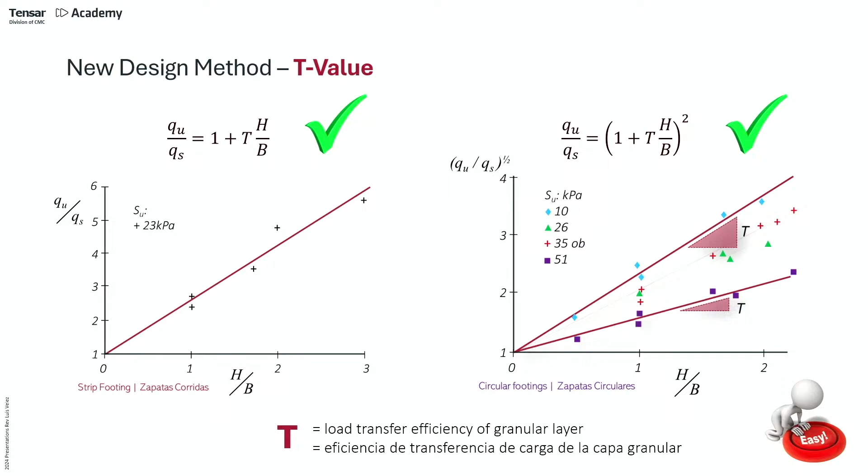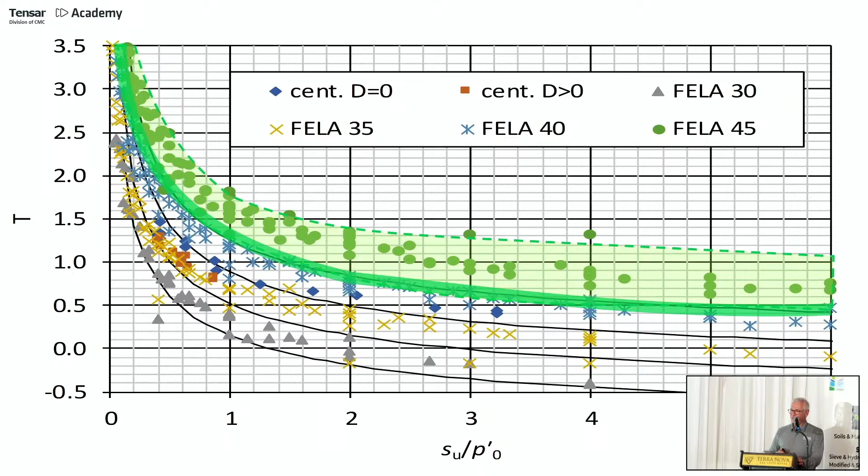If we're looking at square and circular, the data is scattered. It's not as simple as that. So for that, what he did, not me, is choose the lower bound of the data in order to be on the safe side. So now I know that if I incorporate this in the aggregate, the behavior of the aggregate is different. It doesn't have anything to do with the resistance of this, the torsional rigidity of this, and all that marketing crap that the industry has. You have to do the research to find out what the t value will be for each product, for each aggregate, in the different conditions. All right, so now I know that this changes the behavior.

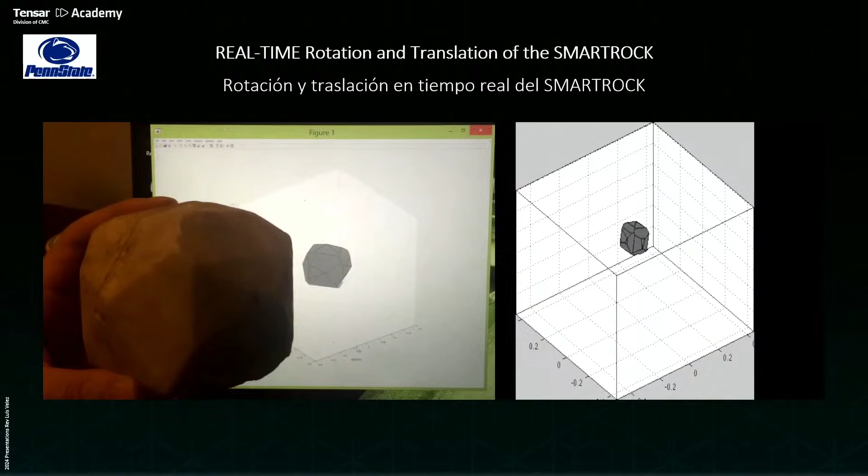ISO, IGS, all of them have recognized stabilization as the improvement of the mechanical behavior of the soil. They change the behavior by reducing the deformation and the particle movement. Okay, take a look. This will be very cool. So this is a research from Penn State. They created the SmartRock, and let me go straight to the testing. Okay, so this is the SmartRock. You can see that in real time, I could see the rotation and the translation of those particles.

So if I put it in a test with and without the stabilization, you can see that the behavior of the soil is completely different. On the first one, you apply the load, it moves, it comes back a little bit, but the deformation is cumulative. On the one that has a mechanically stabilized layer, you can see that the deformation is not that much. The same aggregate, the same loading, the same load cycles, but different behavior. You can see here the graph that shows the translation, but the more important one is the reduced rotation of the particles. You guys have limestone here, and it's very, very important to restrain their movement, because if they scratch each other, they will break.

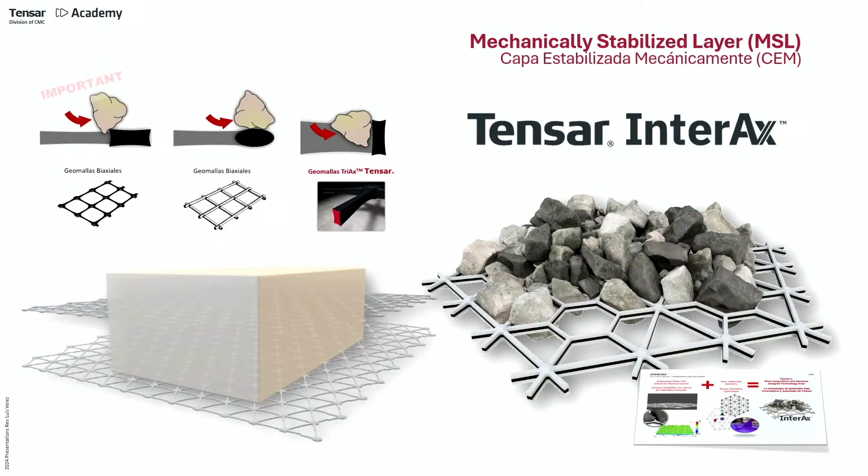Okay, so this is the typical aggregate, how it behaves. When I lock it in, now the aggregate behaves differently. It can hold more load and restrict deformation. So all the geogrids work. Different types of geogrid I have here, all of them work, but they work differently. And I cannot make a design with one, just select the product data sheet and say that this product's data sheet is equivalent to this one. You have to do the design for each one of them. So this is the lateral confinement that is achieved with this type of technology.

Okay, so now that I have them, I could go and create a parametric study, determine the t value, do full testing, apply what Ishihara and Macedo created, and now I have a system to deal with liquefaction. At the end of the presentation, I'm going to show you guys a sample of how to do the calculations.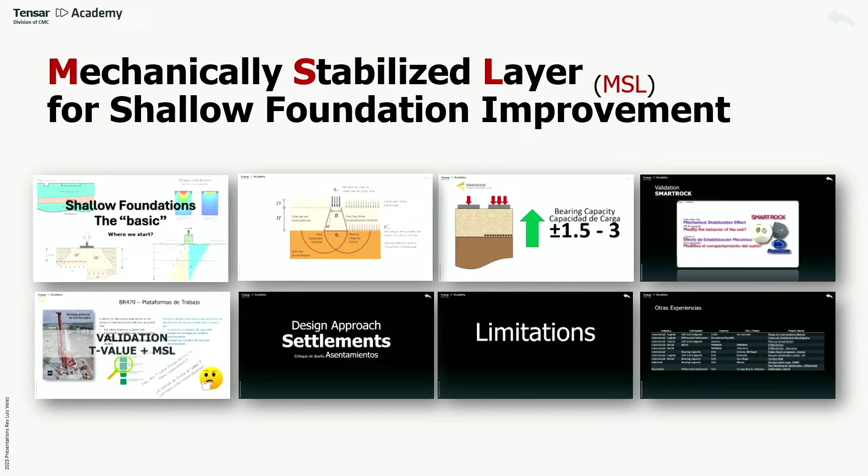So not just for liquefaction, I could do that on regular bearing capacity. I could increase the bearing capacity of your soil. Let's forget about the earthquake now. But if I do this type of technology, I could increase the bearing capacity between 1.5 and 3. I could reduce the settlement between 40 and 60%, and basically reduce or eliminate differential settlement.

So that's another application. Typically, we do buildings between 1 and 5 stories. We do retaining walls on top of this, or catch basins. That's another option for this type of application. So whenever you have a problem with your bearing capacity, that will be one additional tool in your toolbox to deal with.

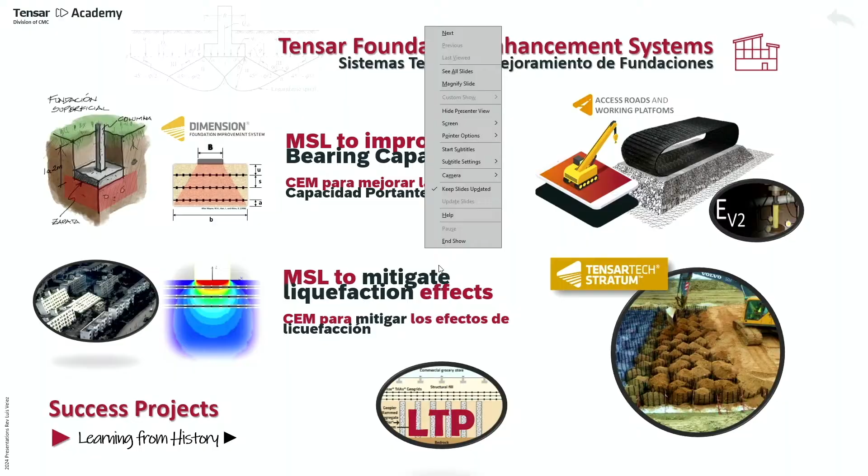All right, so we finished with the foundation.

Angel, I told him that I'm not gonna allow him to talk, so I'm gonna do his presentation. All right, so for that, okay.

All right, so let's change gears now. So we already saw retaining walls. We saw foundations. Now let's take a look at roads and highways. For that, I prepared this very quickly here. What do you think if we go out there and we ask the Jamaicans what they think about the country roads? What do you think would be the opinion?

All right. The only problem with this perception of the public is that at the end of the day, guess who they blame? Us, the engineers, the contractors, the consultants. That's where they put the blame. They can blame politicians also. I don't know. But at the end of the day, the people who are in this room, civil engineers, contractors, we sometimes overlook, or we let the pressure on us lead to the wrong design.

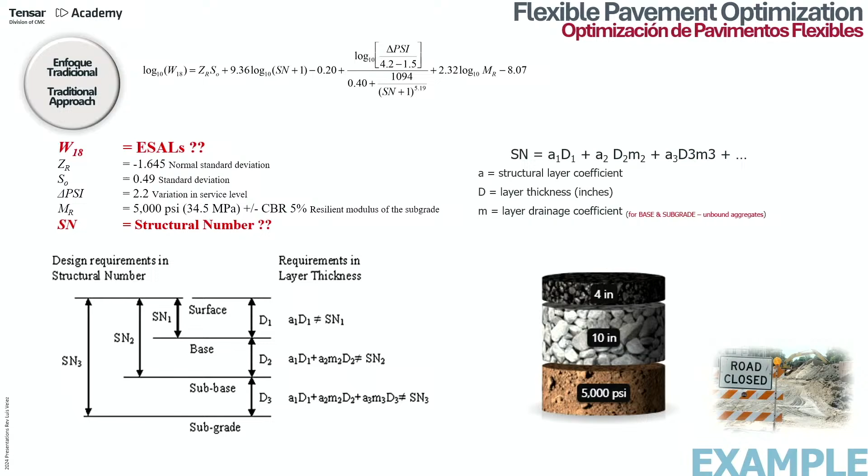On that one, basically you take all the parameters for the calculations, and then you create a structural number for your pavement section based on the contribution from the asphalt, the base aggregate and the subgrade, adding all that together, and you come back with a structural number that reflects the structural capacity of that section. So let's say that for this sample we have 4 inches of asphalt and 10 inches of base, that gives me 176 ESALs. That is basically how much damage from trucks I could get.

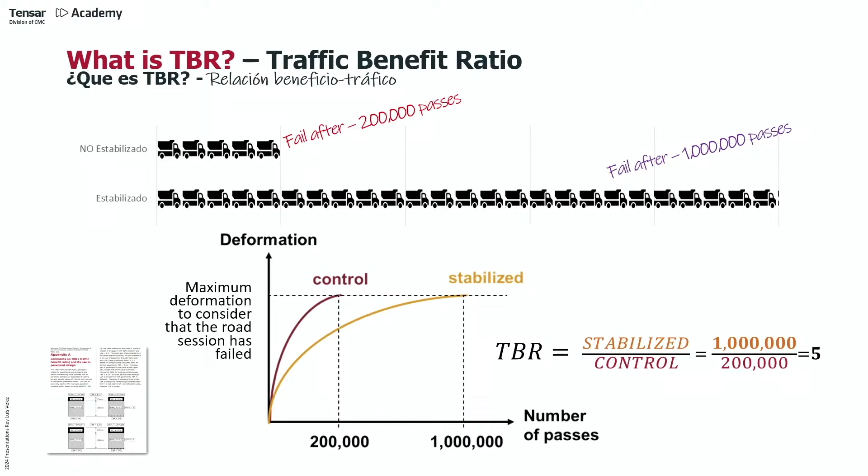So my question to you is, where in that equation do I put this? There's no place there. We know that the traffic gets better when we include one of these technologies. And if you follow the marketing and go to the internet, basically they're going to talk a lot about TBR, the traffic benefit ratio, to include one of these. And they typically give you a number. Or most likely you will find graphs showing the tensile strength, the rigidity test, the torsional test, and they will tell you the higher numbers. At the end of the day, none of that data means anything for the pavement design.

Okay. So AASHTO recognized that, hey, this works. So basically, they created this document R50-09 that says this works, this reduces thickness, this improves the pavement life, but you have to test the section. You cannot use the physical properties of the material in the design.

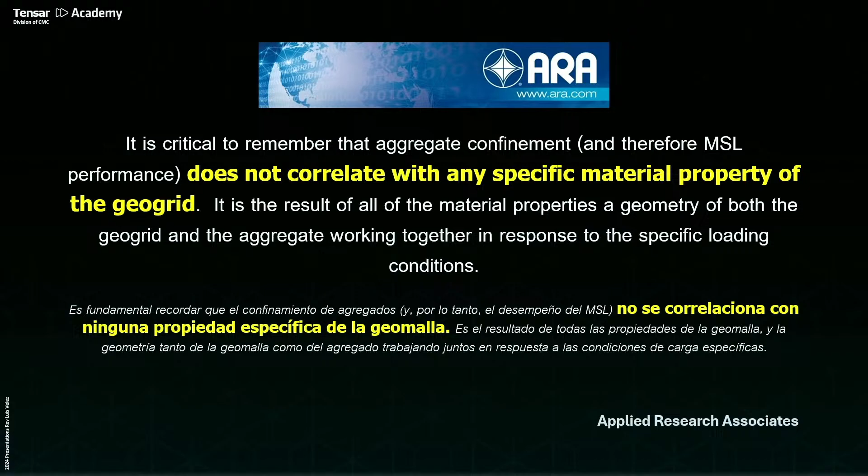Keep in mind, they say that the properties of the material, the physical properties, don't correlate with the performance. Okay, so this is how the testing is done with them. Then now that I understand the different behavior of my aggregate, and depending on the thickness and the strength of the subgrade, I could assign the new coefficient.

So the coefficient is based on the aggregate quality and the subgrade. Now I could take the same road, redesign that with a new structural value and the material, and I get a different performance. Or I could use that to my advantage to reduce the thickness of the section.

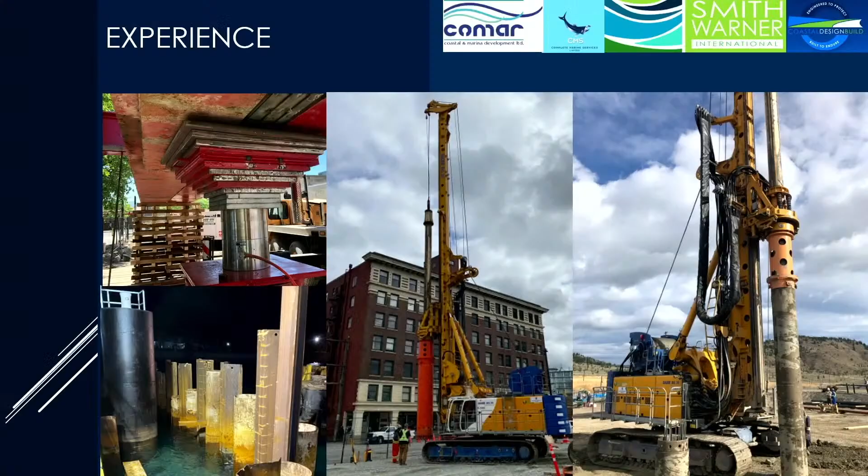So before starting to jump into that, as Victoria introduced, I would like to mention something that you guys, or at least the young engineers, are not looking at. The dream for an engineer is to try to get to the top. Everyone wants to get there, be a manager, an owner, a principal, a designer. But my perspective and my advice, what I did myself, was to start from the bottom. When you are on the field, when you check, when you revise, when you talk to your operator, to the foreman, when you share time with them, you actually learn.

You actually have all the options and the tools that you need to, a couple of years after, jump into a position. So I encourage the young engineers to go down that road. Sometimes it's a hard one to follow, but it's really joyful. And the end goal that you get is best to jump up the ladder and try to get something else. So I encourage you, it's hard, but I can guarantee the engineers who have 20 or more years of experience will agree with me that that's the best way to go.

A couple of projects that I have done in the past: as Victoria mentioned, I have worked in Colombia on several projects, more than 4 major projects, more than $50 million each, where we developed ground improvement, foundations, sheet piles, any kind of pile, civil works. Specifically, these ones on the right are in Canada. We did a couple of soldier piles, which is basically a cast in place pile with reinforcement that will be linked to the structure.

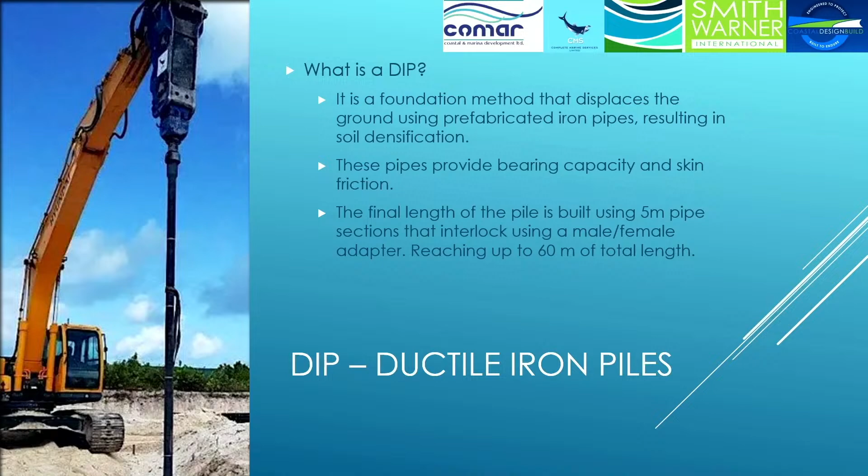It's a male-female connection, and the good thing about this technique is you don't need any specialized equipment. As you can see in the photo, an excavator can do the job. The only thing you will need is the attachment that goes on the boom of the excavator, and after that you're good to go. The other thing about this technique is, as you know, if you have ever been involved with piling, piles always come in fixed lengths, right? 30 footers, 50, 60 footers, you name it, depending on the design that the geotechnical and the structural engineer have agreed on.

These pipes, because of the length, can be shipped in 20-footer containers. So basically, you can get all the pipes that you want in containers, which will save you money. It's easier to transport, and not sure if you guys have been involved, but with the steel pipe piles, because it's bulk that needs to be carried for transportation, it's a little bit hard to

get it. We understood that better when COVID happened and there were restrictions on shipment and nobody wanted to move. So this kind of thing helps a lot and saves you money just from the purchase perspective. Right there, when you're bringing these pipes, you can get them cheaper than bringing a steel pipe pile or even a concrete precast.

For the installation, as I mentioned, basically you have a start, which could be open-ended or close-ended, so it could be with a point. That way you're going to look for bearing capacity. Then you work with a two-man crew. You don't need more than two. Two-man crew and your operator. Basically, you're handling each pipe, trying to reach your design depth. The equipment on top of the excavator will generate high vibration, which drives it through until your design depth.

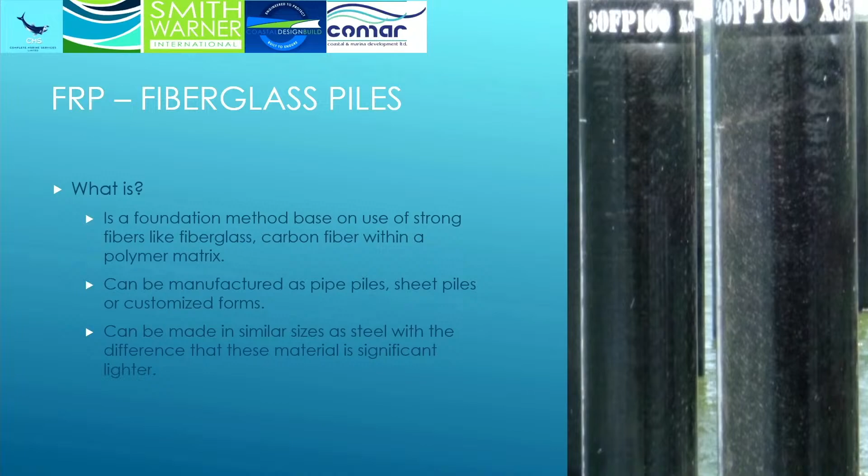So the next one is the fiberglass piles. Installation-wise, it's just the same as another driven pile, but it differs in the material that you're going to put into the soil. The resistance, the expected load capacity, is similar to steel. Actually, it's higher. But the good thing about these piles is they have really good workability under corrosion. So when you have corrosion problems, when you have environmental problems that will reduce the lifespan of the pile, this is a great solution.

Basically, you could easily change from a lifespan of 50 years to more than 100. What you do is a little bit more investment at purchase time. You purchase a material that is a little bit more expensive. The installation cost is almost similar to a driven pile. The difference is this material is lighter, so you don't need big equipment to lift the piles. That's a saving there. And the other saving is in the future.

So as you are aware, most of the piles used in ports and bridges, when they come into contact with corrosion, you have to start thinking about maintenance. So all those structures have a maintenance plan, right? So you have to change the pile or cover the pile, or worst case scenario, which is the last thing you want, remove the existing structure and rebuild it.

What happened on the island is, sadly, this hasn't been discussed enough. And sometimes governments and clients get to the point where they need to remove the existing structure and rebuild everything. So to try to remove those additional costs, looking into this option is best. It's just about understanding where to use it. So anything related to marine works, docks, small ports, marinas, it's a great opportunity to use this kind of pile.

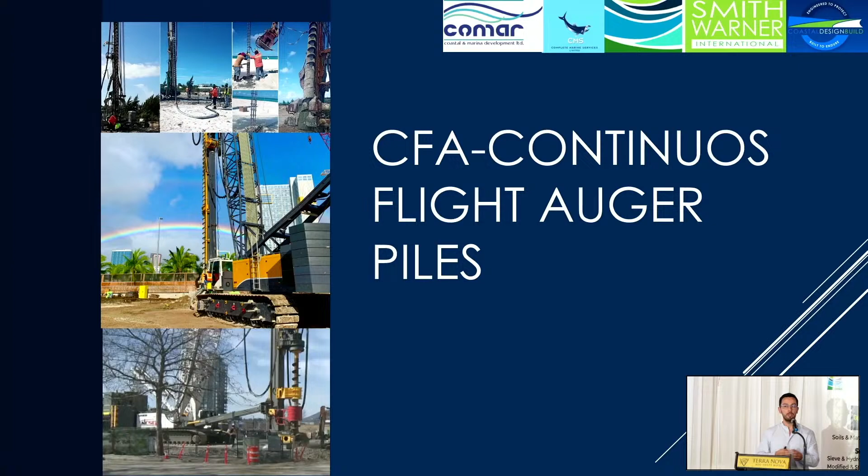Now, this technique has been more developed here in Jamaica, as I believe so, and in some other islands, same in the world. The CFA piles. Those piles, basically what we do is we drill through whatever length or whatever depth you want to reach out to. Then, as soon as your auger, which is the drill that you have in there, reaches depth, you're gonna replace the soil that has been removed with concrete, right? After you take your auger out and the pile is filled with concrete, you place your reinforcement after that.

There are a couple things that need to be looked after with the CFA, and the reason why I said an expert needs to be here is you need a mix of good things. Making the hole is pretty simple. Anyone can do that. The problem is when you're pumping your concrete up, that's where the whole thing starts to change. If your pace of removing the auger out from the hole is too fast, you're gonna start to have problems because you're not gonna fill the hole with concrete enough. So you're gonna start to have holes, which means that your rebar is gonna be exposed, which means corrosion is gonna happen, which means you're gonna have an issue.

That's the first problem. The second problem is you do the hole, you fill it with concrete, you have integrity, so your pile is completed, right? If your concrete provider is not good, if the concrete hardens too fast, your rebar is not going to go in. So basically, you're pushing your rebar cage down, and maybe you get half of the cage down, and then you have an issue. The only solution for those problems is cut the rebar and redrill. Redrilling through rebar, trust me, it will take weeks.

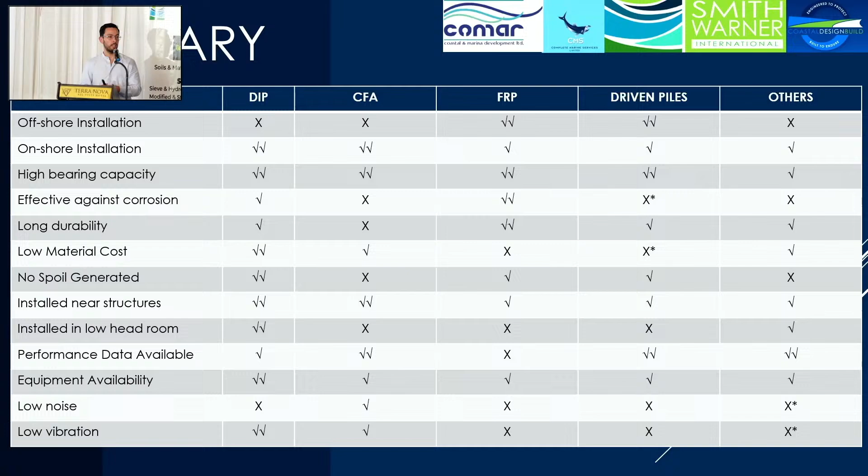And on top of that, it will let you save cost. Just imagine that you use a safety factor that tells you your pile is 35 meters, right? Which was kind of what we did in Kelowna. When we performed the test with the load the client required, oh Jesus, now we have to go to 42 meters. But it could be the other way around. Maybe you forecast 45 and you only need 20.

So you're saving 20-something meters, or 10 or 5, of concrete, of time, of rebar, and that will bring you a lot of savings. So the good thing about this is for you to offer, and that's always my advice for everyone: you always want to price whatever your client wants, right? We are here working for people who want whatever they have designed. But you have the right and the potential to offer an alternate.

Clients will always be inclined to see something that will save thousands, maybe a million. But this is the only way to be able to know: to understand what you have down below, to compare what you have, to know what you have available in your town, what your people are capable of.

And the other thing about the data, at least on the contractor side, is you need to know how fast you can go with your people. You need to know how many piles you're going to install. You need to know how many days it will take. Because if not, that will result in a problem, and you're not going to be able to know how fast you're going to go and what to offer to your client at the end.